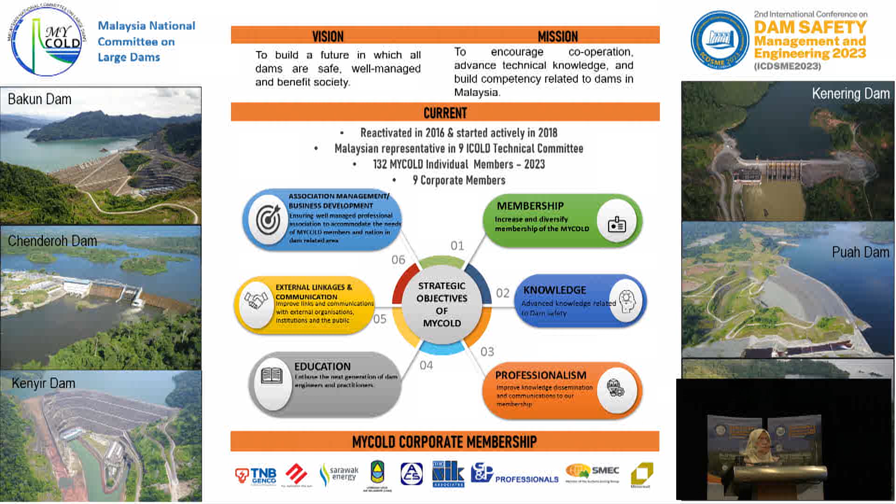I am honored to declare that at ICDSME 2023 conference, we have accepted 78 papers out of 95 submissions from 7 dam safety-related tracks. And all these papers will be published in Scopus Index publications.

At our conference, we have both technical and poster sessions where researchers from various institutions will demonstrate their works related to dam safety management. So it is inspiring to see participants and dam experts from more than 15 countries convene here in Kuala Lumpur, Malaysia, for presentation, exchange of knowledge, and to discuss important topics related to dam safety issues.

As part of this conference, MYCOLD has organized keynote speeches by prominent experts, pre- and post-conference workshops, and a forum on dam safety by world-renowned dam engineers under the theme of Resilient Dams for Safe Communities.

In addition, MYCOLD has also organized Best Dam Operator Awards to acknowledge the dam operators that follow best practices in order to ensure the safety of dams and surrounding public. We are also jointly arranging 2 technical tours to Sungai Perak Hydroelectric Scheme and also Klang Gate Smart Tunnel and Putrajaya Dam.

Distinguished guests and participants, I would like to express my heartfelt appreciation to MYCOLD for their invaluable cooperation and support in making this conference possible. And with that, I would like to extend our special thanks to Mr. Marcelino, President of MYCOLD, for his tireless efforts and dedication to our shared mission.

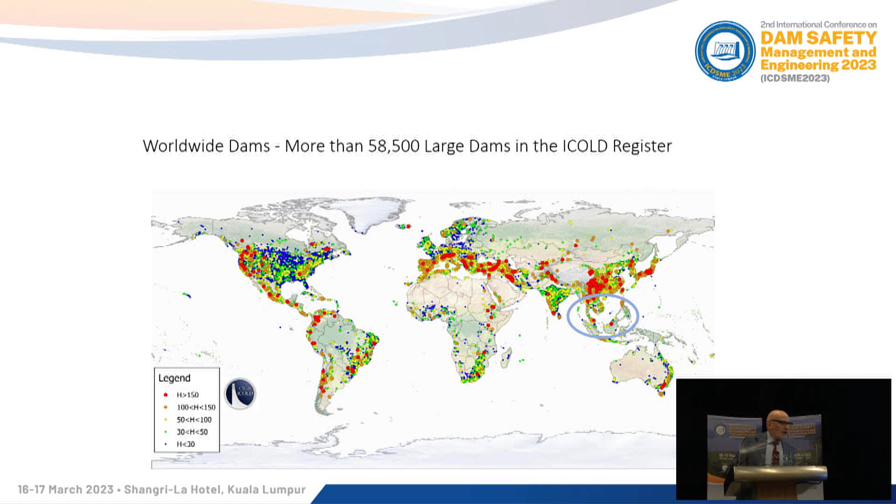Dams are numerous, with around 60,000 large dams in the ICOLD register, and of course there are more than that in reality. On this map you can see the distribution of dams in the world. The colors refer to the height, with red indicating dams higher than 150 meters.

Dams are important and unique infrastructures, and they deal with very critical subjects such as water, energy, and flood control. It is widely recognized that engineering failures and incidents provide valuable lessons and advance the state of practice.

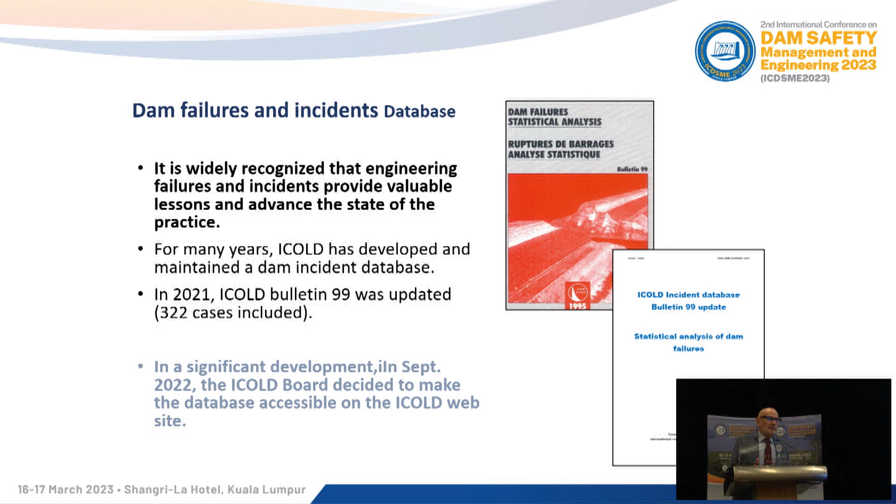For many years, ICOLD has developed and maintained a dam incident database. In 2021, ICOLD Bulletin 99 was updated as a significant development. In September 2022, the ICOLD board decided to make this database accessible on the ICOLD website. ICOLD has played a key role in the highly significant improvement in dam safety.

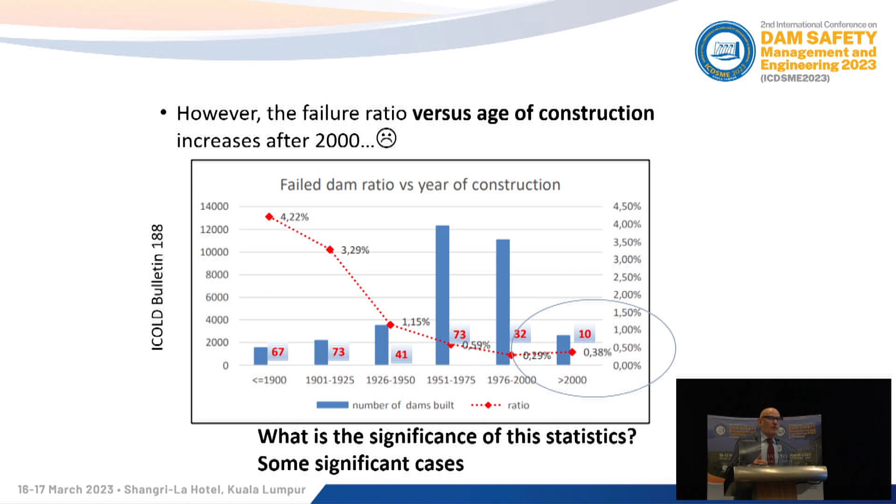What is the significance of these statistics? We will examine some significant cases of recent failures.

Tokwe Mukosi Dam, Zimbabwe, 2014, is a 90-meter-high CFRD dam with a reservoir capacity of 1.75 billion cubic meters. The reservoir filled up without its upstream facing, and you can see the result with water going through the embankment. The cause was an undersized diversion tunnel. Hopefully, no failure occurred, and the dam is currently in operation.

Ituango Dam, Colombia, May 2018, is a central core rockfill dam, 227 meters high, a very high dam with a big reservoir of 2.7 billion cubic meters. The diversion tunnel was blocked by a landslide near the end of construction, causing uncontrolled rising of the reservoir level. To save the dam, it was accepted to discharge the flow through the power plant cavern. 1,000 cubic meters per second were flowed under 200 meter head in unprepared waterways.

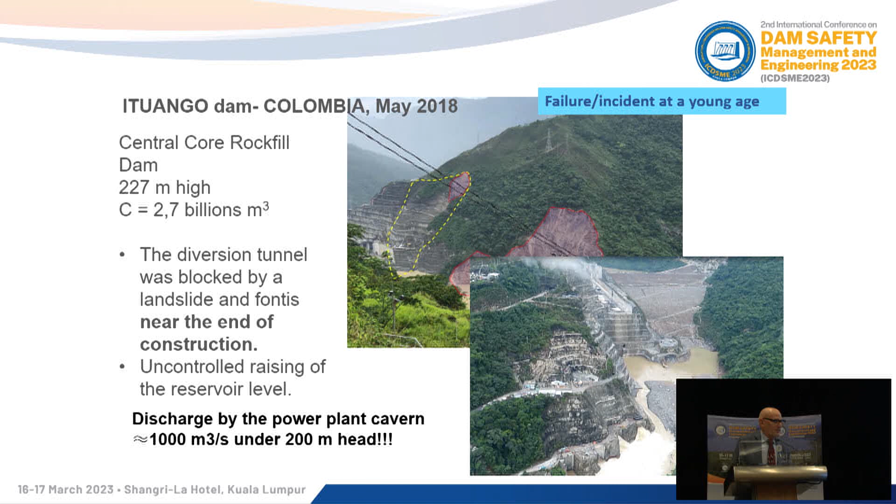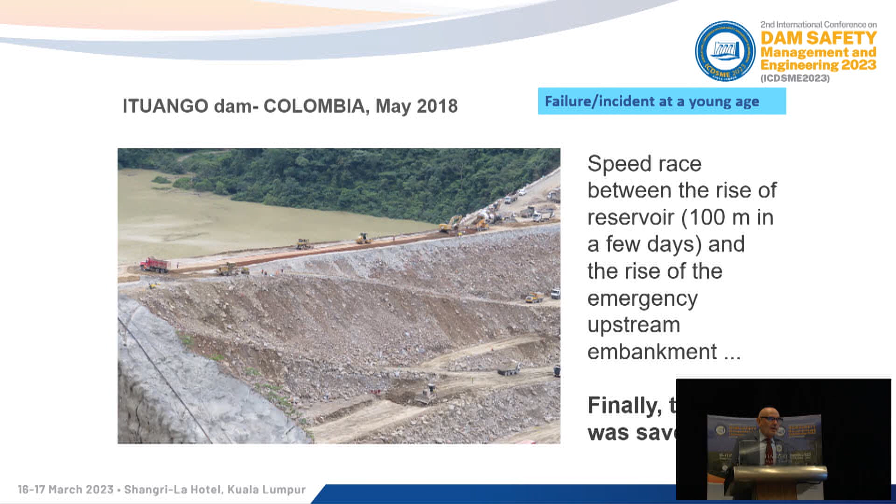There was a speed race between the rise of the reservoir, 100 meters in a few days, and the rise of an emergency upstream embankment. As you can see, it is not the total section of the dam, only a partial upstream section. Finally, and by chance, the dam was saved. But my comment is that we went very close to a major failure, which would have been terrible for our profession and the dam industry in general.

Another recent failure: Xe Pian-Xe Namnoy, not far from here in Asia, in July 2018 - failure of Saddle Dam D of a large hydroelectric scheme during the first filling.

Xe Pian-Xe Namnoy Saddle Dam is a homogeneous dike, 16 meters high on a 16 or 17 meter lateritic foundation. No foundation treatment was provided. Abnormal settlements were recorded before failure. No overtopping occurred. The cause of failure is regressive erosion in the pervious and erodible lateritic foundation.

The total volume of the Xe Namnoy reservoir was 1 billion cubic meters, and the released volume was 0.5 billion cubic meters. This means the failure of the Saddle Dam was completely equivalent to the failure of the main dam as far as volume release is concerned. And it happened in a secondary valley where no emergency plan had been prepared. 140 casualties occurred and more than 12,000 people were affected.

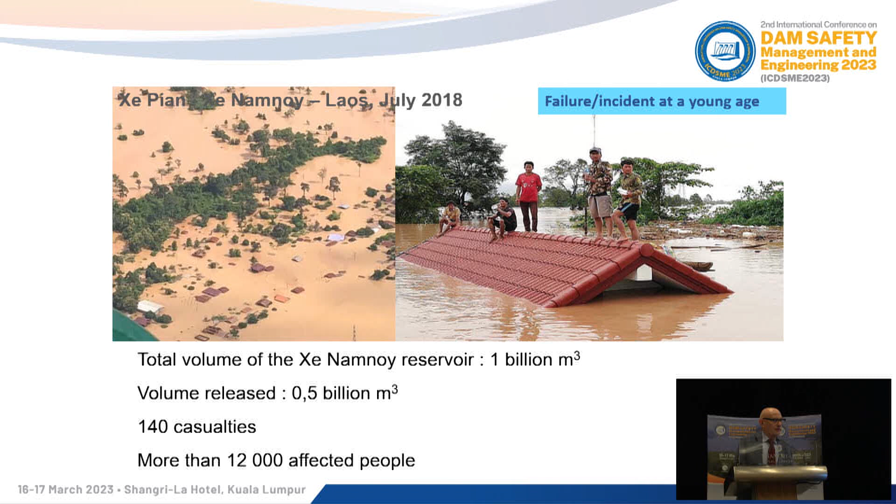Sardoba Dam, Uzbekistan, May 2020. An embankment dam, 29 meters high, commissioned in 2017. The volume of the reservoir was near 1 billion cubic meters, and the failure occurred during a flood.

There were severe transboundary issues. Few casualties were reported, but inundation and damage were very extensive. An emergency plan was activated, and 70,000 people were evacuated in Uzbekistan and 20,000 in Kazakhstan.

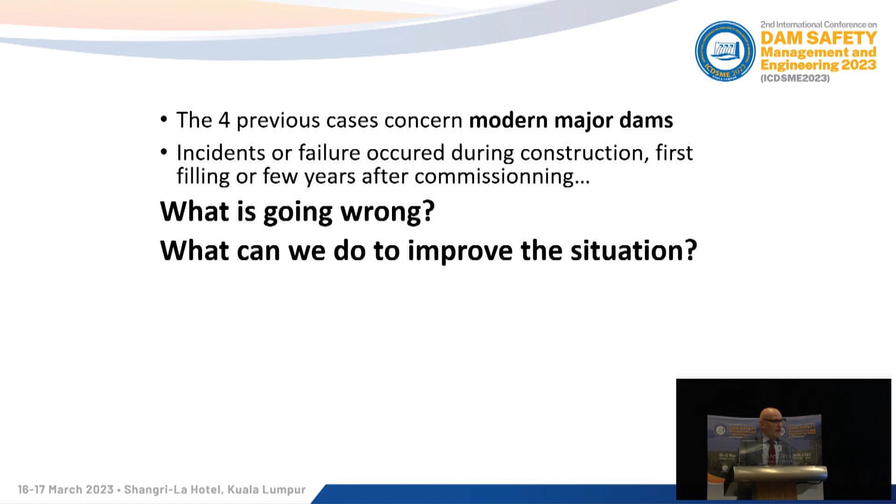All these failures occurred during construction or in the first years of operation, during first filling or the first year of operation. It's not acceptable that in very large, very structured projects, we have such type of incidents. So we are wondering what is going wrong, and what can we do to improve the situation.

The following cases are related to another very important failure context: failure during flood. And this risk, of course, is increased by climate change.

For example, also very recent, Edenville Dam in the USA failed in May 2020. It did not fail by overtopping, but it was filled very near to the crest, and this unprecedented level of reservoir caused static failure, static liquefaction failure. The dam broke, and a second dam downstream was overtopped and also destroyed.

In Xinfa Dam, China, the failure occurred by overtopping—you see this photograph just before failure, in July 2021. This is also a case of cascade failure: a downstream dam also failed after this event.

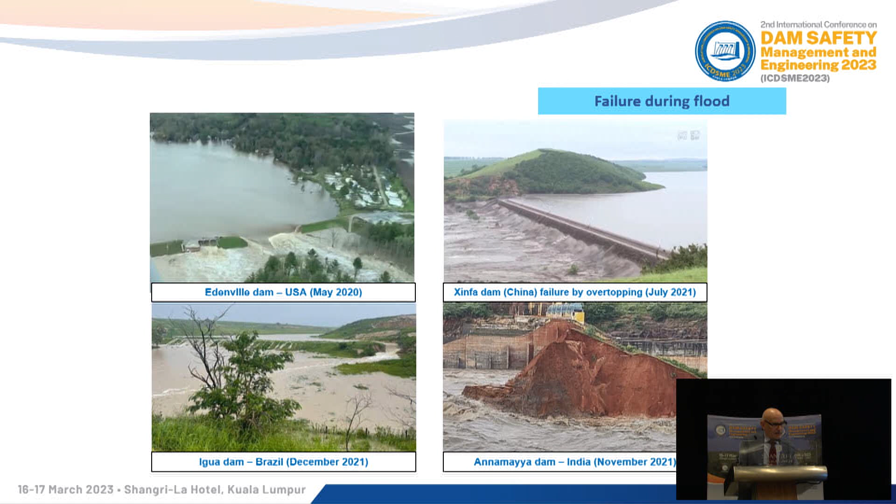ICOLD mission statement. Now I will speak a little about the World Declaration on Dam Safety. ICOLD's mission statement says that ICOLD leads the profession in setting standards and establishing guidelines to ensure that dams are built and operated safely, efficiently, economically, sustainably, and socially equitably. Dam safety has been a core value of ICOLD since its foundation in 1928. In 2019, ICOLD issued a World Declaration on Dam Safety, which you can see on the poster.

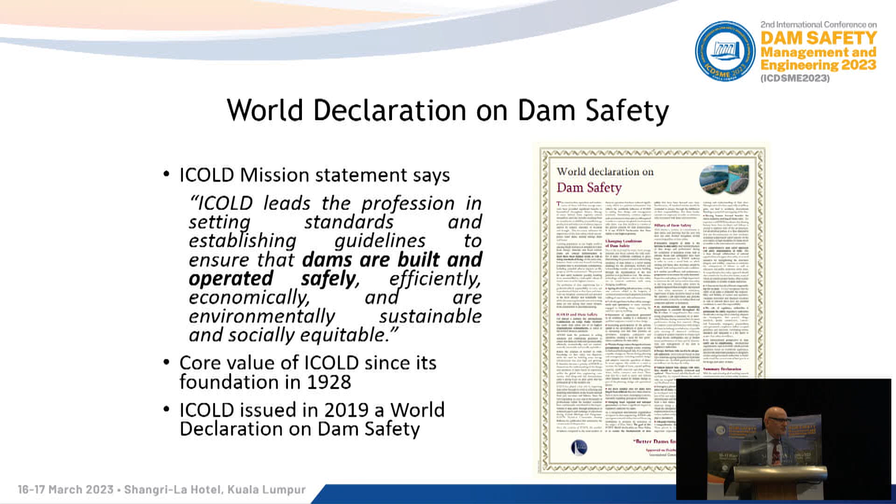What are the pillars of dam safety according to this declaration? First, structural safety: the dam must be safe in normal operation and in extreme conditions, flood and earthquake. ICOLD bulletins provide guidelines to address this structural safety.

The second pillar is vigilance in surveillance and monitoring. It is of utmost importance to understand the behavior and performance of the dam, to be prepared to maintain the dam if something is going wrong.

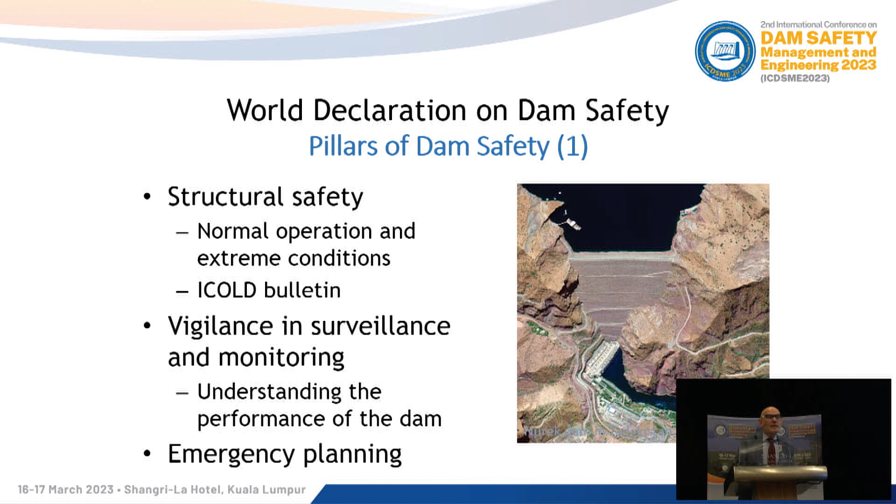And the third pillar is emergency preparedness. It is roughly said that if you have this type of plan, the losses—the casualties—are divided by something like 10 times. So it is very important. We cannot be sure that no dam will fail, but we have to be sure that the least possible number of people will be affected.

Another pillar of dam safety is sharing lessons of success and failure. It is of utmost importance that when we have dam incidents or accidents, it is largely published, and the Dam Safety ICOLD Committee is working very hard on this, and this information goes into a database accessible now to everybody.

Also, national governance is essential. It is the first level of dam safety. I appreciate a lot the efforts of Malaysia, who has recently stated a new framework of dam safety. Also, owner's responsibility. It should be clear for everybody that the owner is at the end responsible and liable for dam safety. And also, I mentioned a general trend in the dam community to go from traditional structural approach of dam safety to risk-informed decision-making.

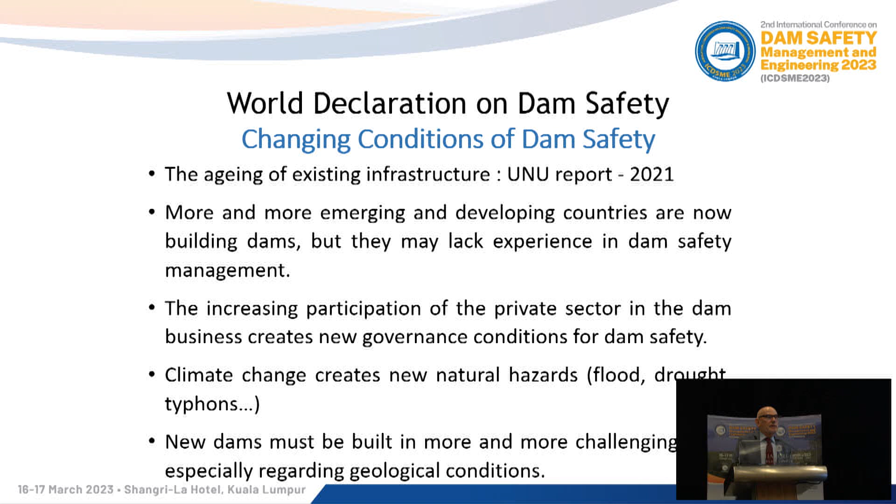Also, we have to acknowledge the changing conditions of dam safety, the aging of existing infrastructure. The United Nations University report in 2021 stressed this point. More and more emerging and developing countries are now building dams, and they may lack experience in dam safety management. The increasing participation of the private sector in dam business creates new governance conditions for dam safety. Climate change creates new natural hazards - flood, drought, typhoon, and so on. New dams must be built in more and more challenging sites, especially regarding geological conditions.

Now some words about ICOLD's action plan for dam safety. One of the first actions will be dissemination of the World Declaration on Dam Safety, and in a way it's what I am doing now, here. A didactic presentation of the World Declaration is prepared to be provided to the National Committee and to help them disseminate the message.

Dissemination of information on dam failures and incidents through the database on the ICOLD website. Capacity building enhancement, in partnership with international organizations, development banks, and everybody that is prepared to that. Promotion of dam safety panels of experts for new dam projects and rehabilitation projects. And last, ICOLD is thinking of preparing an ICOLD list of certified experts. This has not been decided at the moment, but it is in the pipeline.

So the key messages I would want you to retain from my speech are: first, dam safety is a core value to ICOLD. Dam safety relies on a strong national governance of dam safety. On the other side, dam safety is a personal duty and sacred responsibility to dam engineers. Failures and incidents provide valuable lessons and advances. Dam safety management is a daily activity and also a long-term commitment for many generations. Thank you very much for your attention.

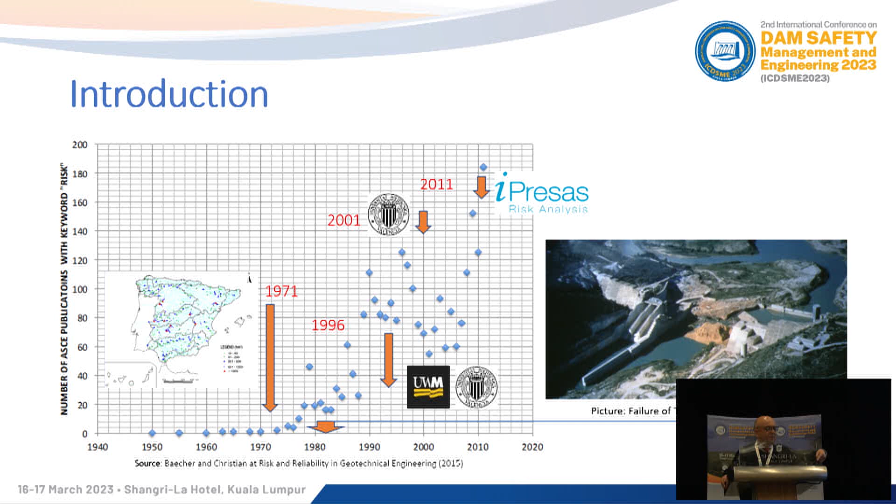I realize that I built my own career, which I will not repeat because Dr. Laria made it very nicely, over that graph. So it's a way to handle this.

In 1982, there was a major dam failure in Spain. It was 60 kilometers away from my home. I was 11 years old. As our president said, many lessons were learned from there. It had everything: there was a major flood, there was a failure in the power for the gates, there were some design problems, but that is the reason I'm here today.

I've built my whole career on this, and Spain has become the avant-garde of dam safety because of this failure, which of course we don't want anything like that to happen again, but we must learn from this accident.

From UPV, where I serve as professor, we created iPresas back in 2011. Except for me, we are a very young team, and we work almost everywhere. The lessons I'm bringing are from practical experience. It's not only a classical professor's PowerPoint. I hope to bring you some fresh insights from the field.

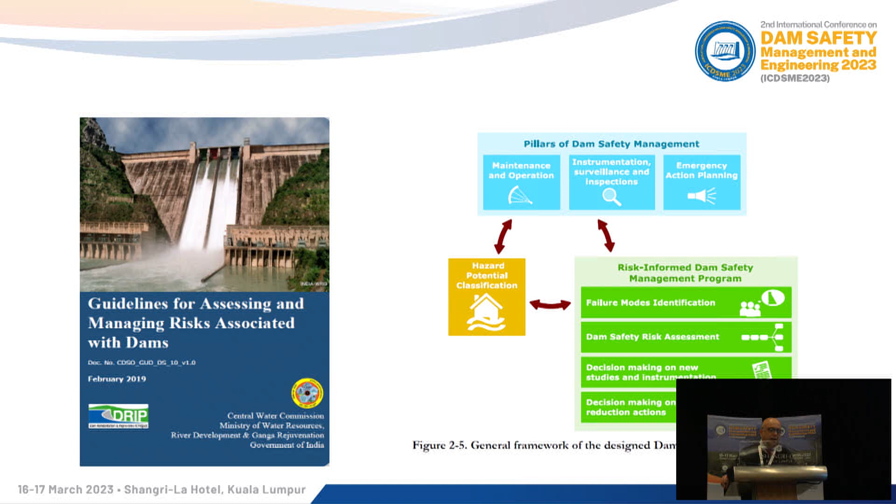I was hesitating to bring this slide, but at that time, the former Joint Secretary of State, Mr. Kundu, was hoping to use this impulse of the DRIP-1 to pass the bill on dam safety in India, and they finally made it in 2021. He very nicely quoted something I told him in a conversation: that we tend to associate innovation with high-tech algorithms and things like that.

But legislation is a very nice way to promote innovation. There might be one little sentence in one law that ignites a full new discipline because it has been backed in law. So let's not forget that lesson either: whenever we get our principles into law or legal documents, we are also creating a big advance in our profession.

Multilateral organisms like the Inter-American Bank of Development have developed guidelines, very recent guidelines. They started in 2007, the last update is 2021, and they acknowledge that they cannot support infrastructure, not only dams, but any infrastructure if it doesn't comply with the principles of disaster risk management and climate change adaptation. I've been working a lot for them in creating this body of knowledge for infrastructure, and we are learning many things.

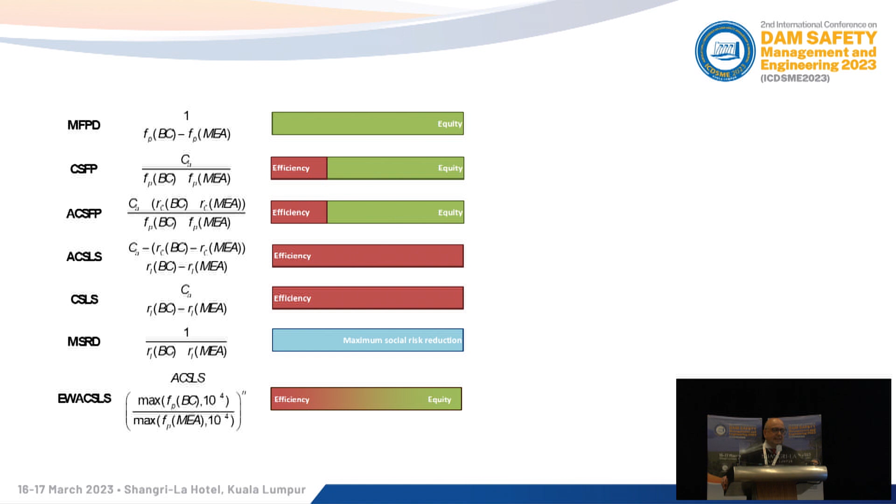These are just a few of the many equations. I think it's been a long time since I've used equations in a slide, but this must be my subconscious that brought some of them. It says if you take the cost of your investment in dam safety minus the economic risk that you save, and also divide it by how much you reduce the social risk, you have the first indicator. Then, if you weight it by how far you are from your target probability of failure, you have this very complete indicator.

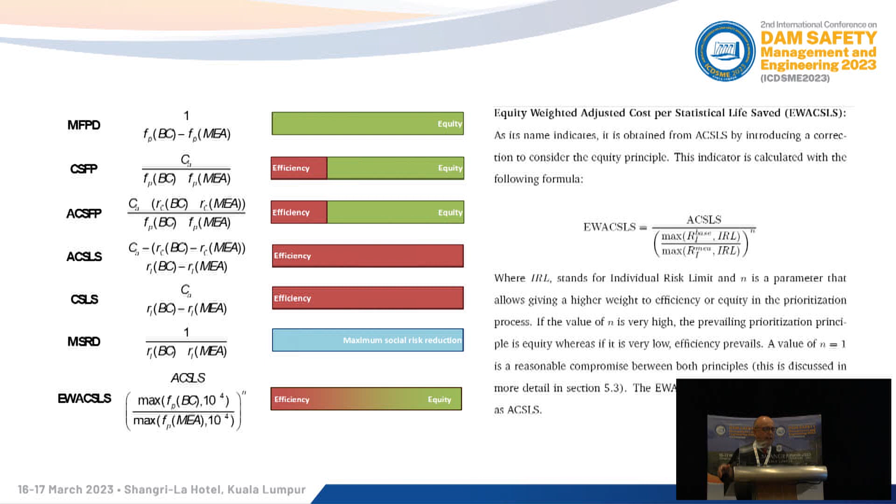As an example, at the Duero Basin Authority in Spain, we had in the pipeline more than 90 actions to do in dam safety. We had to spend roughly 100 million euros to keep our dams safe, and we needed to choose what is the best route to do that.

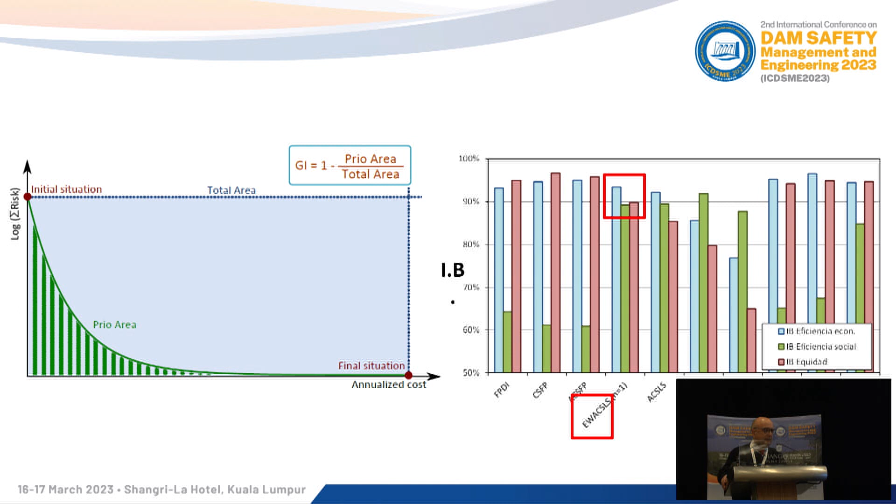I know there are plenty of researchers in the room, so there are some papers you can download that explain, at a high level, the use of these risk indicators in investment decision-making. These two papers explain much better than me today what I was trying to communicate, but there are other papers as well.

Also, if you're interested in how to apply these techniques to systems of dams, or mixed systems of dams and levees, or where uncertainty might be affecting your path, we have developed a lot of research and practice on this that I kindly invite you to download and read.

Time-dependent issues include climate change, and there are more things going on—we'll see more of them. You can imagine that the social dynamics, how people move from one place to another, the exposure behind our dams, is one very strong factor together with climate change.

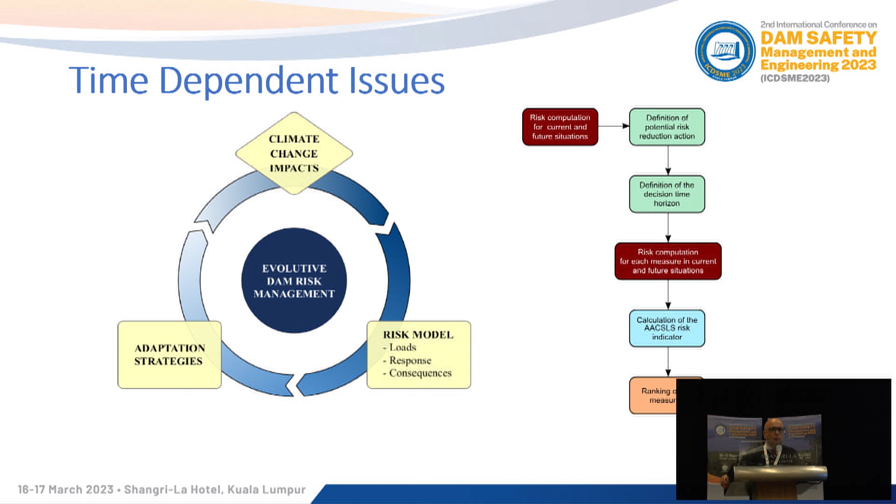Remember, in many systems we might be having more extreme floods, but we might also be having a lack of water resources, and sometimes these effects will compensate.

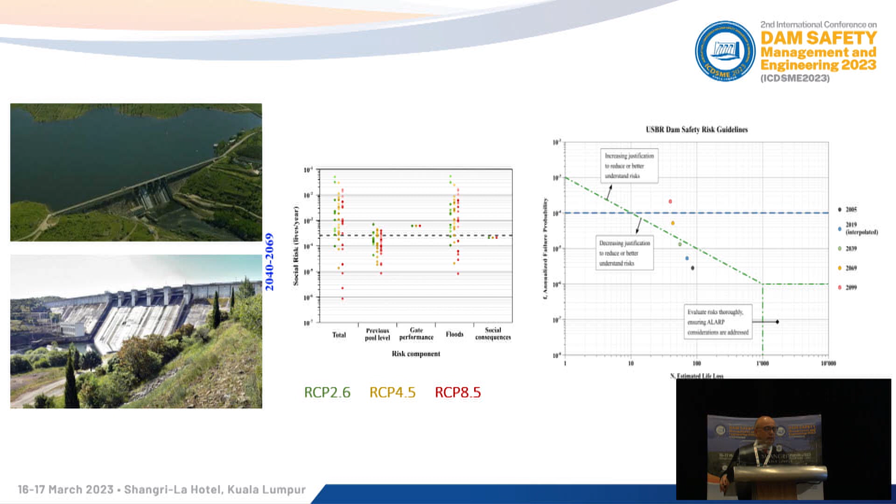It will also help us understand how often we have to repeat the analysis to incorporate new knowledge that has been generated. So I don't say that's going to happen in that dam—I say that's the best we can forecast with the data we have today, and we will keep working on that. The important lesson is we have tools to get prepared on time, and we should be looking at those tools.

Time-dependent things can be less mysterious than climate change—everything takes time. We need not only to decide what we invest in, but what the timeline is. Some investments take years to approve and put in place; others are very fast, and we need to incorporate the variable T in our equation. We were happier 20 years ago when we were thinking of risk in a more static vision.

This is an example from a regional government in Spain. We've worked with them for many years. I think I presented some pre-results in Ottawa at the ICOLD conference.

You see that they went through a path over a number of years. The dams are not that high, but they are very significant—very useful in terms of water supply—and they have plenty of problems. I wouldn't call them pathologies, but at least major problems.

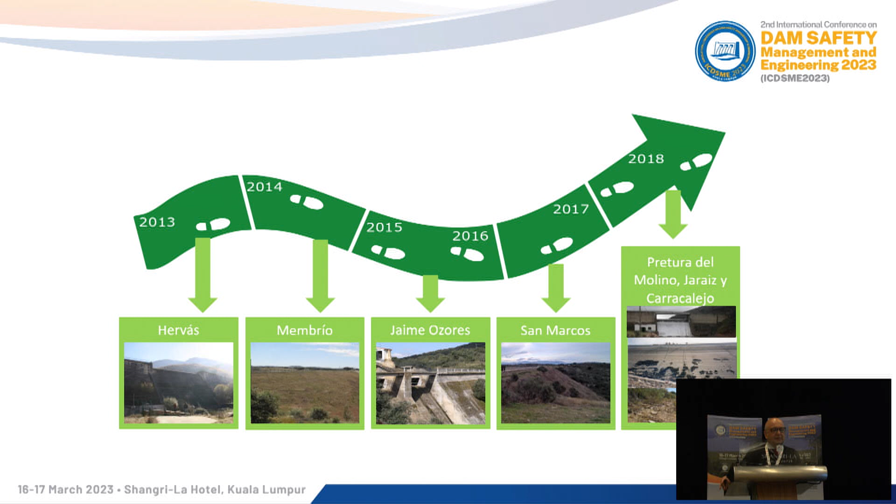Now, when we analyze them, we go through the whole process: we do the failure mode analysis, we do quantitative risk analysis, and we find a list of to-dos. Some of them are implemented, some ongoing, some planned. But this cannot be a static picture of the plan, because we will be gathering new information, having problems implementing some actions, facing delays, and encountering windows of opportunity that we cannot renounce.

If we have an opportunity to do something, we are not going to say, just wait a second, I'm two more behind in the list, right? So we have to incorporate all that flexibility in our management.

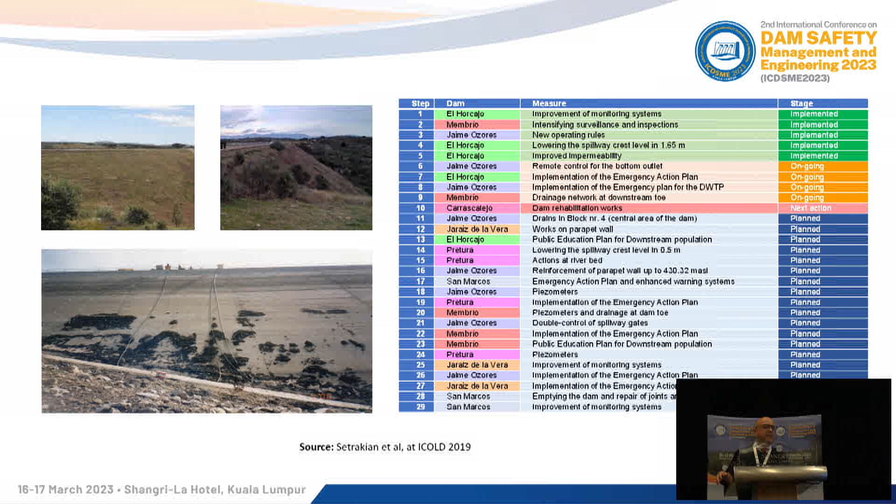It includes design of the rehabs, and yes, we can use risk to make our design as accurate as possible. In this case, we use risk to decide how much we had to lower the crest of that spillway.

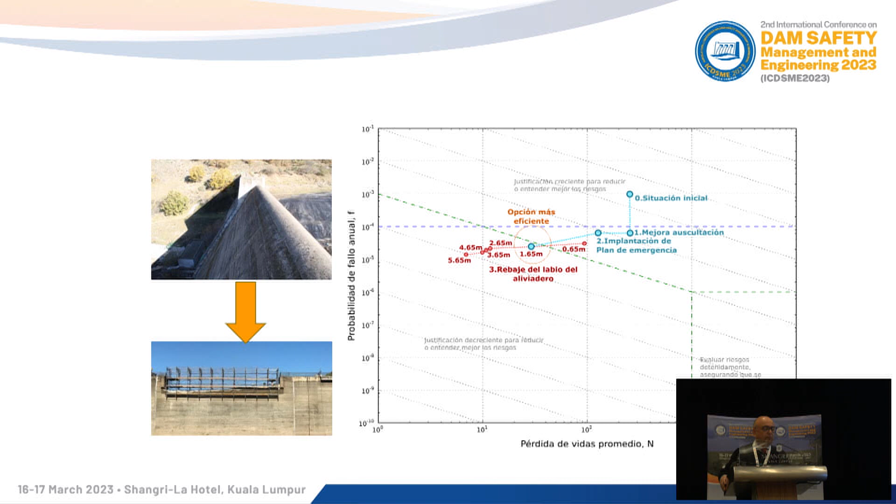We have incorporated the variable T in our tools to allow owners to re-estimate the path of risk reduction when they gather new information, for instance from instrumentation, or new estimates on climate change, or something as simple as: I have the opportunity to do this thing first, and how does it affect my risk reduction path? In the workshop we had yesterday, we calculated many of these paths, and some of you that were there yesterday will appreciate this in a different manner.

So at the end, the tools we are providing today have risk, have investments, but also have a timeline, and allow you to re-evaluate your path of investments according to better knowledge or these different realities around your dam and environment.

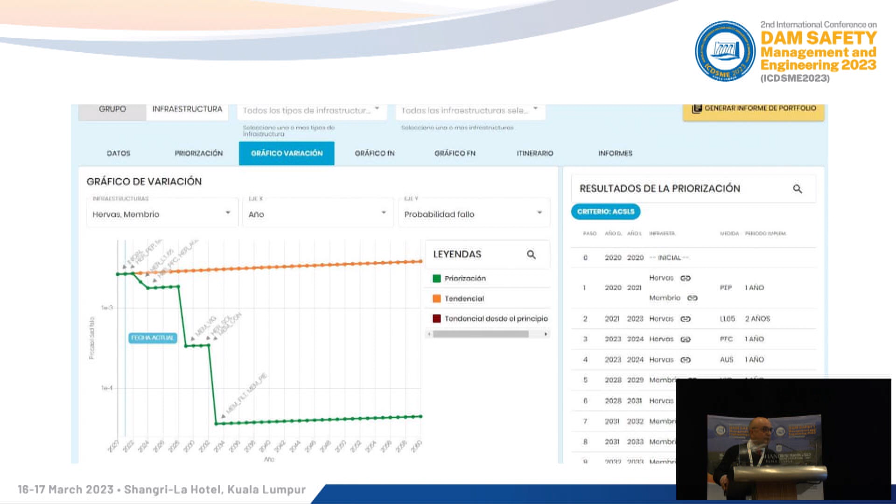You can also dig into this in papers in indexed journals, and I encourage particularly young researchers at university to go through this, but also professionals, hopefully they will be inspiring or provide some little light in this complex problem.

Next, please. Some international examples, because if you don't show what you do in the field, it's what I call - I think I said that yesterday also in the workshop - a PowerPoint dam safety presentation, but it's not real dam safety practice if it's only in the PowerPoint.

So we can escalate the intensity and the complexity of the different tools. This is, for instance, Brazil. We use a screening type of tool, and regardless, screening risk analysis is not suitable to make big decisions. It was very useful to organize the information, to understand what were the general pathologies of the dams, and it enforced many other actions in a significant number of dams that we could visit, and we calculated the so-called risk indexes for them.

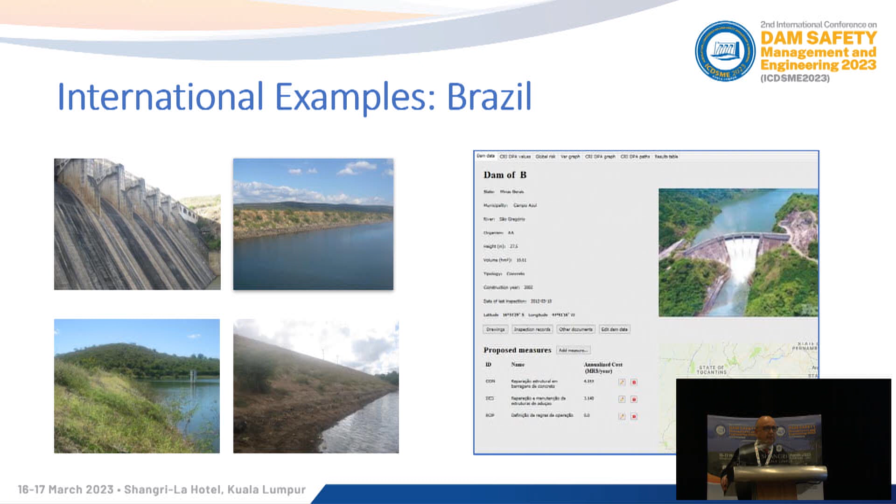India, as I mentioned, and Devendra, I think, is there. I think India must be very proud of what they have achieved in these last years. And we had the opportunity to do a full pilot case that has been incorporated in the Indian guidelines.

And we studied Bhadra Dam. We provided what we thought could be a risk reduction path, but also what would be the most efficient gathering of new information. For instance, if the uncertainty is brought by hydrology, and you were thinking in major investments in spillways, you have to balance between gathering information and make sure you do a no-regret type of investment.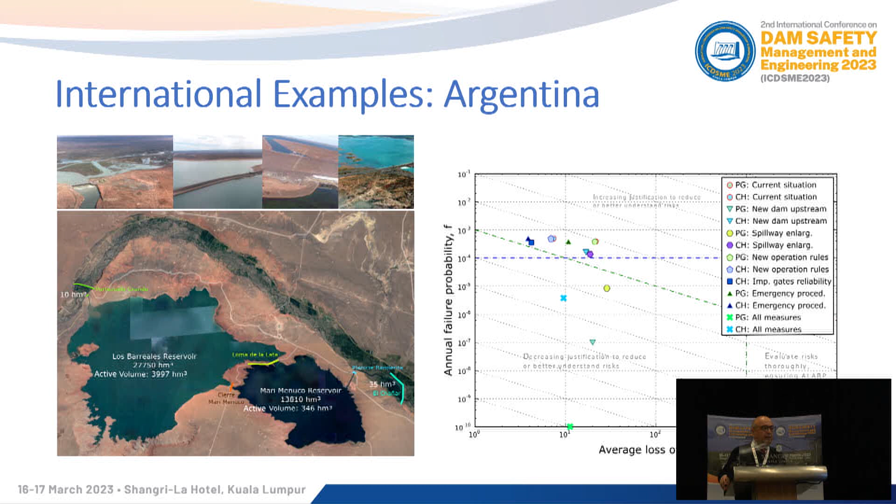by improving gate reliability and changing the operation, and using a new dam that will be built upstream for flood protection, to really put the system in a very comfortable area.

Next, please. I'm finishing. Malaysia.

Malaysia, TNB, GENCO, and UNITEN are doing a very ambitious work. They used four of the dams to navigate all what I have said in my conference so far, from a screening tool to a risk assessment that can be potentially used in any other dam, and creating a risk-informed process.

I have to say that it is very ambitious, but it's kind of what I don't want to call mainstream, because that's like lowering it, but after everything has been backed by the World Bank, the IDB, so many ICOLD committees and bulletins, this is theoretically mainstream. In practice, there's a long way to go.

And Malaysia has taken a significant lead in this, and I have to acknowledge and appreciate that. Next.

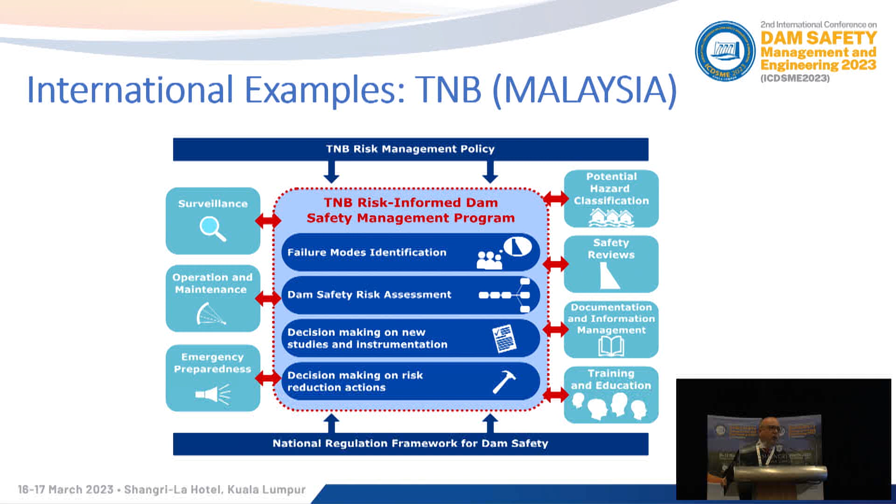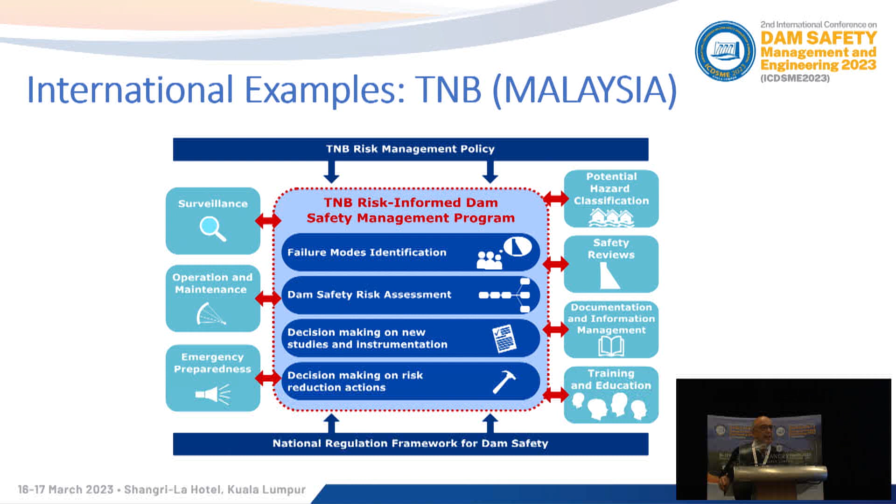So, again, final remark. They are using risk acknowledging that it has to be linked to good practice in dam safety. So everything around classical and the pillars of dam safety are integrated in the risk-informed framework. From emergency preparedness to safety reviews, all is fitting the risk-informed framework.

Next, please. Spain, full-scale national dam scheme. I will not take much time on this, but the government is doing it for 370 dams at the same time and in 4 years. So it's a very big challenge.

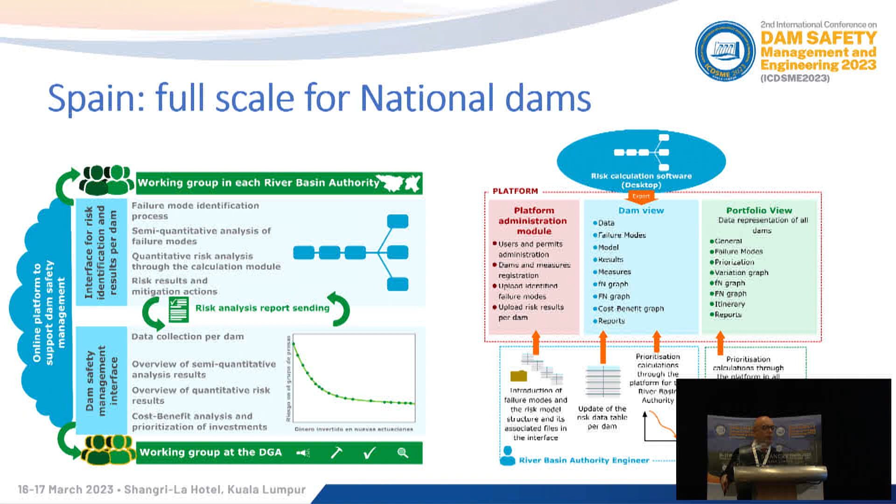Next, please. This is very similar to what I said about the Malaysian approach, in which there's qualitative assessment, quantitative assessment, and two queues of investment: the investment in knowing more and gathering better knowledge, and the investment in rehab. The two queues have to coexist properly and with periodic updates.

Next and last, please. I think we often forget about the people. You don't make this happen overnight. You need people to do the assessments, you need trained people, you need smart people, and you need motivated people. How do you get that? That doesn't happen because you want it. It needs a plan. And it's an amazing challenge, but the best of the risk-informed process is how you engage people in dam safety.

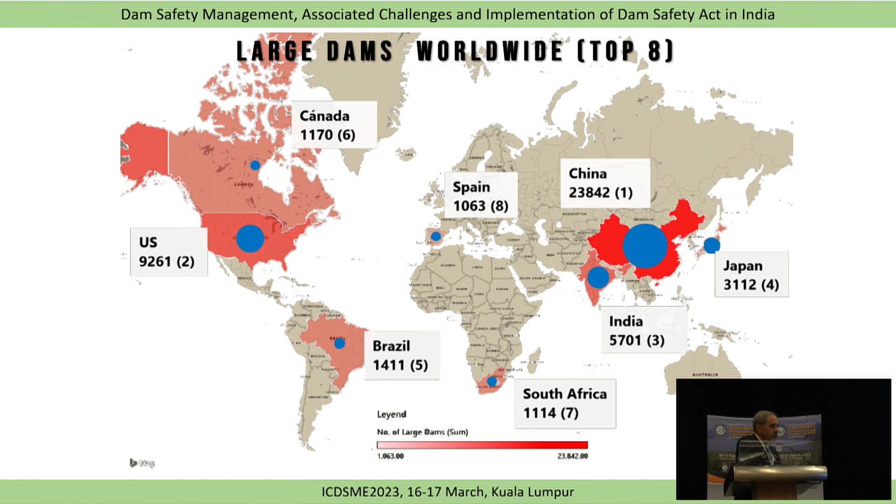Okay, so as you're aware, the largest number of dams in the world are in China, followed by United States, and third is India. So we have about 5,700 large dams. We have about 2% of land resources, 4% of water, and 18% of the world's population. So there's a big challenge to provide water security to 18% of the population in the world. Next.

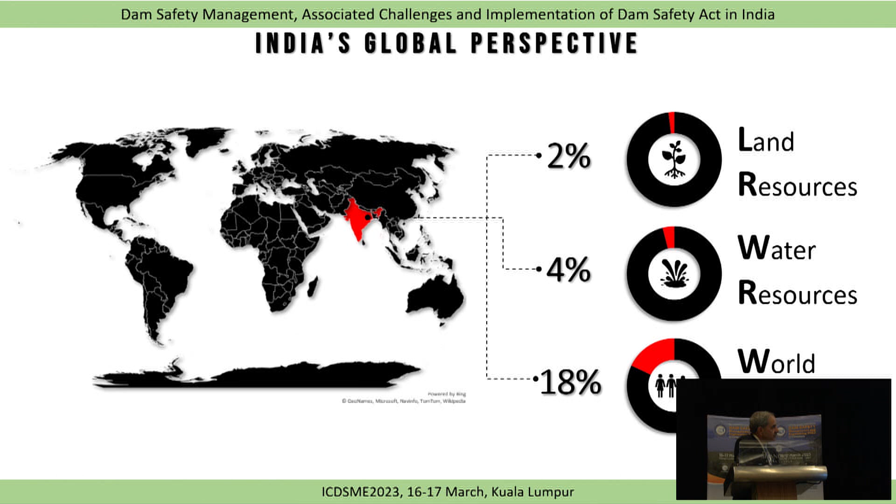There are about 5,700 dams in India, and the largest number comes from the western part of the country and the central part - Maharashtra, followed by Madhya Pradesh, followed by Gujarat. The numbers are concentrated in central and western India, whereas the large dams are in the Himalayas. Up there, the numbers are small, but the capacity of those dams is very large.

The dams are aging, and we have about 293 dams which are more than 100 years of age, about 1,050 dams which are 50 to 100 years of age, and about 3,000 dams which are between 25 to 50 years of age. So the dams are aging very fast, and we need to act on dam safety in a big way.

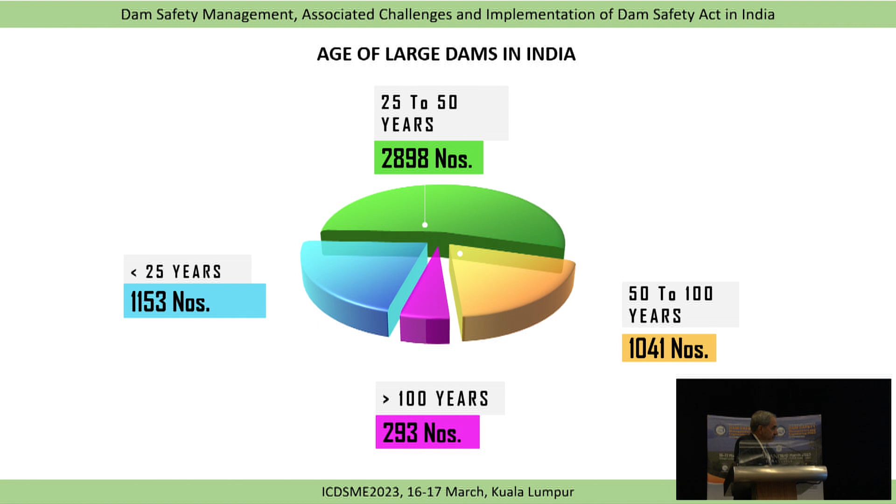We have dams which are 20 centuries old. In the 2nd century, we have the oldest Thanjavur Dam, which is still working. We have a dam which was constructed in the 10th century, and it is also working. Another dam, constructed in 1892 in Mumbai, is still under operation.

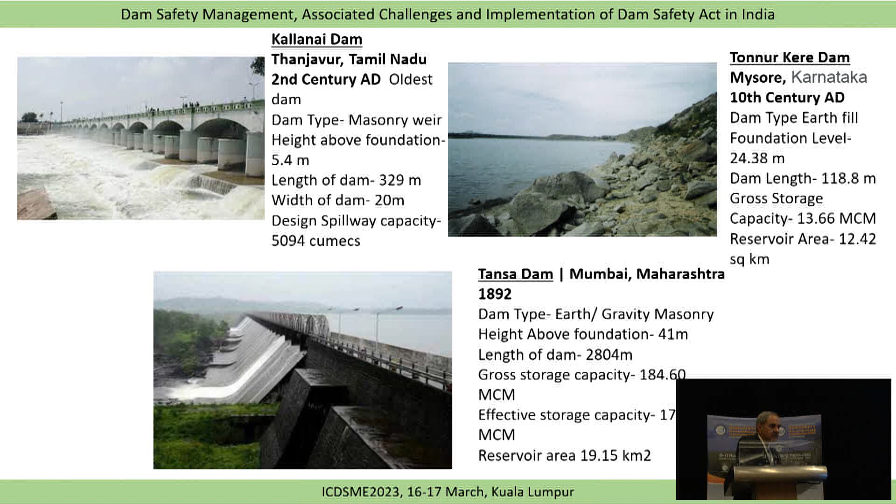And I remember in the year 1985 or so, we started saying in India that we have a duckbill spillway, which was redesigned to pass a higher flood. We also have the Borgua Tal Dam, from 1694, constructed by the then Maharaja of the state.

Regarding dam safety initiatives - dam safety is something which is an ongoing process. You can't do it in a day. You have to focus on it on a long-term basis and it needs concentrated efforts. If you think you'll do dam safety in a year or two years, you are mistaken. We have to make it a way of life and inculcate it into the system.

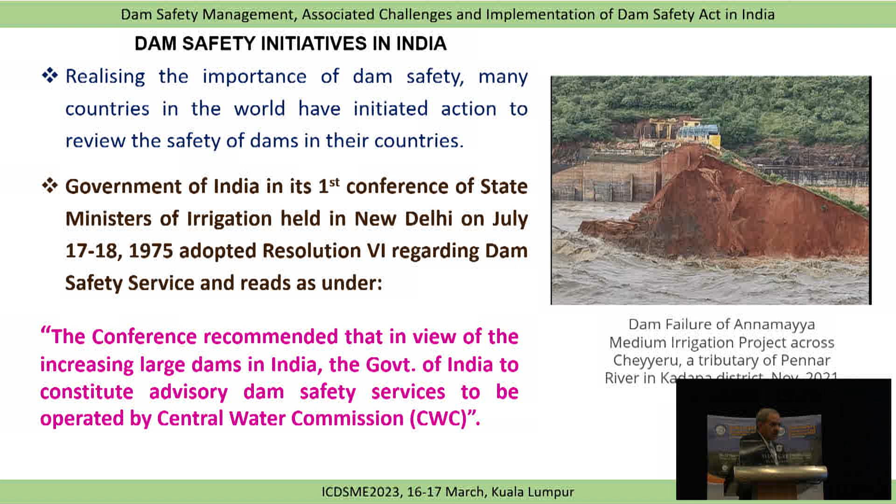Then in 1979, there was a big failure - the Machu Dam failure in Gujarat - and about 1,800 people lost their lives. Taking a lesson from this failure, we established the Central Dam Safety Organization, with the objective to assist in identifying causes of potential distress, perform a coordinative and advisory role for state governments, lay down guidelines, compile technical literature, organize training, etc., to create awareness in the states about dam safety. The limitation was there was no legal framework, and this organization had no power of enforcement - they were an advisory body telling states things that were not enforceable. That was the drawback.

The Central Water Commission then encouraged the states to have their own dam safety organizations, and immediately 18 states and some Government of India organizations followed and started working on it. Again, there was no uniformity in administrative setup or functions of these dam safety organizations. In the majority of cases, the role of the dam safety organization was restricted to an advisory capacity, with little scope for proactive intervention in dam safety and rehabilitation measures.

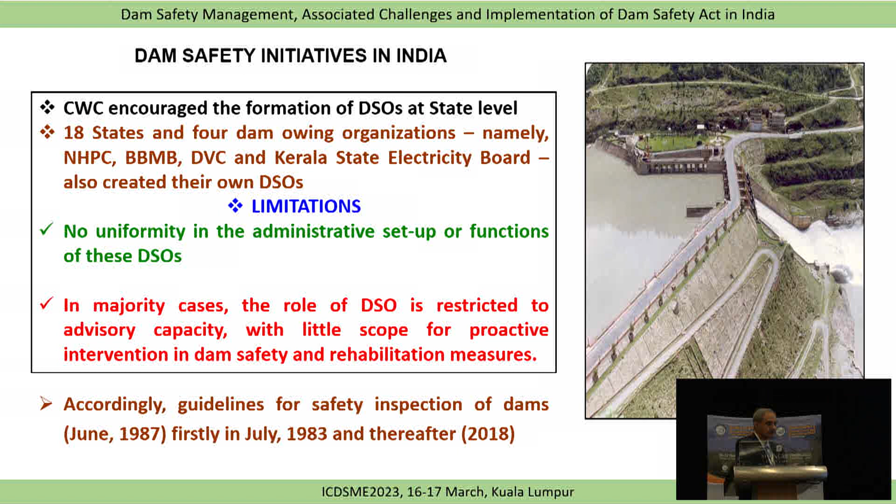Keeping that in mind, we started working, in 1991, on dam safety for our dams, and we rehabilitated about 33 dams. Banking upon that success, we thought - why not take it up in a big way? In 2012, we started the Dam Rehabilitation and Improvement Project. This was a 10-year plan, and it concluded in 2021.

Then phase 2 of the project started in October 2021, and we also came up with the Dam Safety Act in December 2021. This act had been debated for almost 3 decades - debated many times in the Indian Parliament - and the question was how states and the federal structure should divide powers, and how the act should very delicately avoid impinging upon the powers of the state governments.

As I told you, in the year 1979, we had a major dam failure. So far we have recorded 42 reported dam failures in India. 6 are masonry dams and 36 are embankment dams. These embankment dams were old dams constructed when they were not designed properly, most of them.

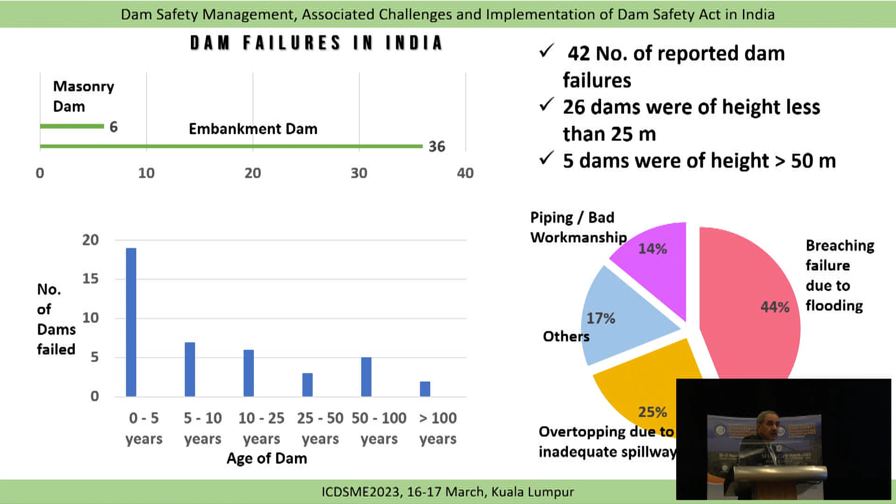So we started, as I told you, phase 1 of our Dam Rehabilitation and Improvement Project. The objective is to improve safety and operational performance of selected dams along with institutional strengthening with a system-wide management approach. The amount spent was about $350 million.

223 dams located in 7 Indian states were rehabilitated. There were different components, and supervision was carried out under Central Water Commission. The key achievement was that the efforts were joint efforts of central and state government, and this was one of the confidence building measures. The Indian states thought that the government of India coming forward under the DRIP program had helped them in a big way.

We carried out institutional strengthening, rehabilitation of 33 plus 223 dams on structural and non-structural measures, environmental emergency action plans, and O&M manuals were prepared for these dams. Capacity building was carried out through trainings and workshops. As Professor Ignacio told, we had 11 guidelines related to dam safety aspects, and we also started long-term asset management through a web-based tool known as the Dam Health and Rehabilitation Monitoring Application. We started the MTech program in the Indian Institute of Science, Bangalore, and the Indian Institute of Technology, Roorkee.

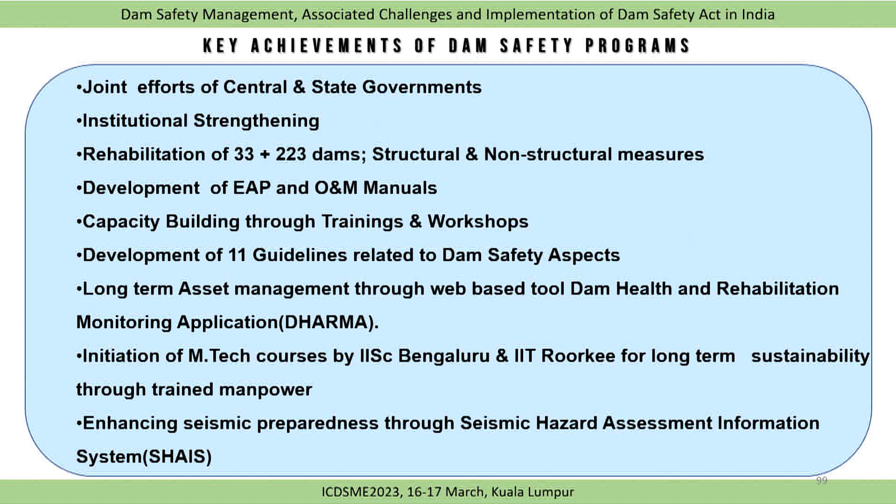Enhancing seismic preparedness through a seismic hazard assessment information system was also carried out. The phase 2 and 3 program is a 10-year program, and it's more ambitious compared to the first one, covering 736 dams in 19 Indian states and 3 Government of India agencies. It's a 10-year program with phase 2 of 6 years and phase 3 of 6 years, with a 2-year overlap between phase 2 and 3.

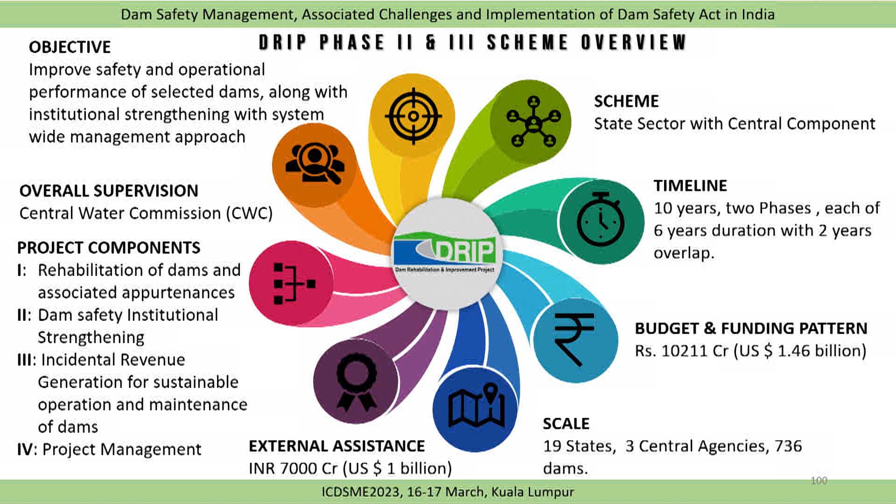Now I'll talk to you about the Dam Safety Act, which is the core of dam safety in India. It was in December 2021 that we enacted this act, and the purpose is to provide for surveillance, inspection, operation and monitoring, and maintenance of specified dams for prevention of dam failure related disasters, and to provide for an institutional mechanism to ensure their safe functioning and for matters connected therewith or incidental thereto. So it has 11 chapters, 56 clauses, and 3 schedules.

So the institutional mechanism under the Dam Safety Act: the topmost body is the National Committee on Dam Safety, an advisory body which makes policy decisions. It sets the policies and guidelines for how dam safety is to be carried out, and I'm happy to share that I'm one of the members in this committee — we have 2 expert members, and I'm one of them. We also have the National Dam Safety Authority, which is the body that enforces the law. The National Committee is the advisory body, but the highest body.

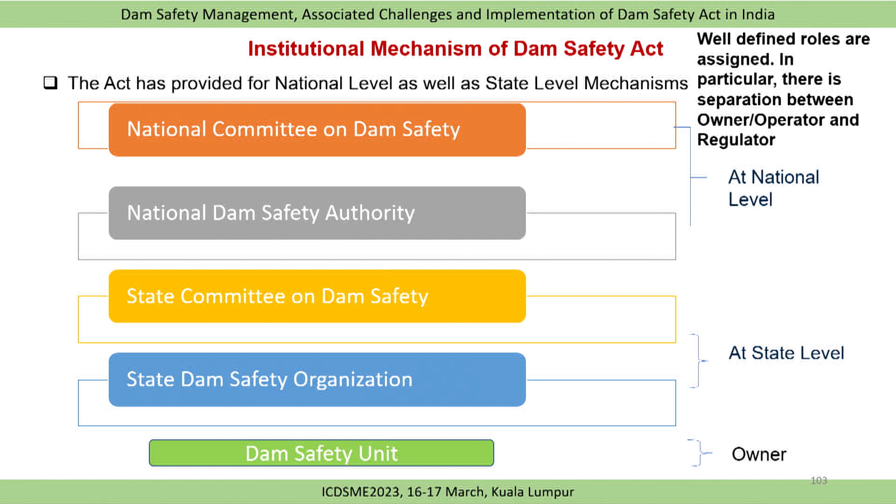This act applies to all specified dams. Specified dams are large dams covered above 15 meters of height, measured from the lowest foundation level, and dams between 10 to 15 meters with different criteria: length of crest not less than 500 meters, capacity of reservoir formed by the dam not less than 1 million cubic meters, and maximum flood discharge dealt with by the dam not less than 2,000 cubic meters per second.

A dam has specifically difficult foundation problems, or is of unusual design. These are somewhat subjective criteria where engineers can decide their dam has difficult problems, so it should also be termed a specified dam. Similarly for unusual design - nothing is inherently unusual, but some dams are being constructed under difficult situations these days, so that is also included under specified dams.

These are the different chapters under the Dam Safety Act.

This is how the entire institutional arrangement takes place. It is the National Committee on Dam Safety which gives policy guidelines to the National Dam Safety Authority. It has subcommittees which decide on policy issues and also produce written documents on different aspects of dam safety. The Dam Safety Authority is answerable to the Ministry of Jal Shakti, which is water resources, and the ministry in turn is answerable to the Indian Parliament.

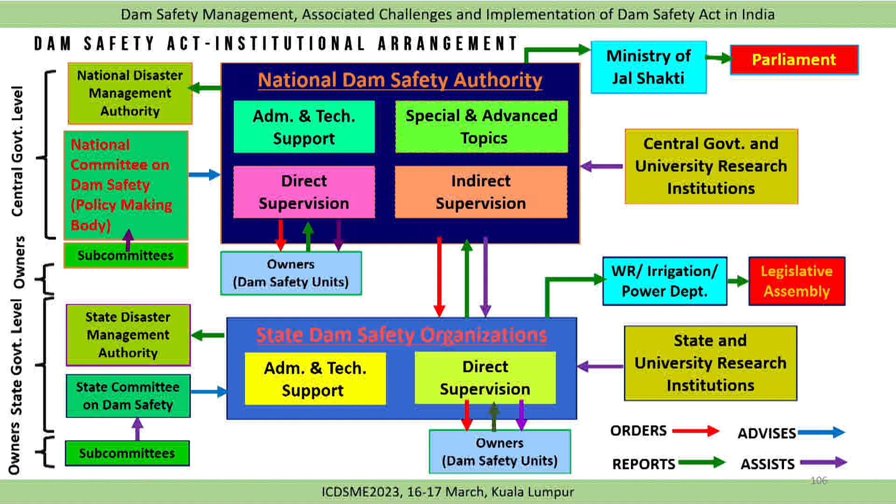What are the challenges? It's very difficult to implement things. As I told in the beginning, it looks good that we have an act, but enforcing this act for 5,700 dams is not an easy task - it's a big challenge. We have expertise at the national level, a lot of expertise available, but when it flows down to each individual dam, there's a lack of expertise in dam owners' agencies, especially in the states, with flood hazard mapping, advanced hydraulic simulations, quantitative risk assessment, and the capacity and expertise of state dam safety organizations to assume their new role.

We adopted this act in December 2021, and they have limitations with expertise, the state governments especially. We need to do a lot of work to create this expertise at the state dam safety organizations level. Capacity and expertise of owners and operators to enforce the Dam Safety Act is limited. Trainings are required on a long-term basis for long-term sustainability of the intended objectives.

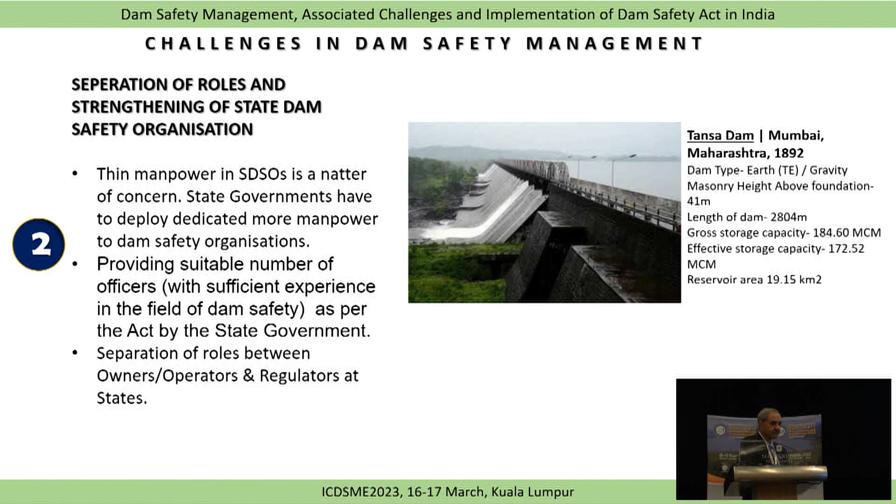Reservoir siltation, yes, it's a big problem. I remember when I was a young engineer, it was told it's a typical Asian problem, but now the entire world says it's a big problem. I have experience carrying out sedimentation and mechanical dredging also - it's not a solution, it's not cost effective at all, it's very expensive. So we need to work on silt management rather than carrying out mechanical dredging.

The sedimentation rate in India is quite high, at 0.72% per year, and till date we have lost about 32 billion cubic meters of capacity.

Instrumentation and monitoring is another area of concern - in earlier dams, instruments were either not installed, or if they were installed, they are not functioning in most of the dams which were constructed in earlier days.

Climate change uncertainties are building up, and we need to redesign our codes. The standard guidelines and code of practices need to be modified to cater to climate change uncertainties. We also need to redesign the spillway capacities. In many cases we have done this, but it's very difficult, and seasonal and annual variation in rainfall pattern is affecting it in a big way. We have seen uncertainties in many rivers where many lives were also lost.

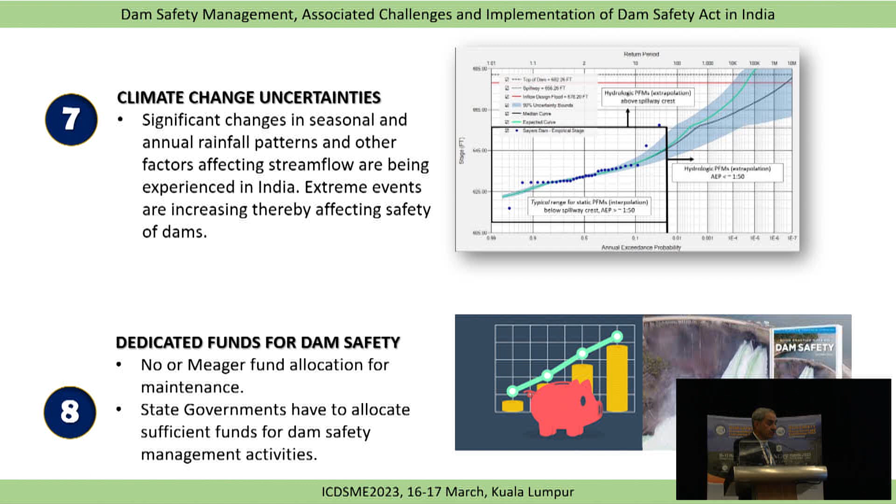Dedicated funds for dam safety is another thing. Although the state governments are now coming forward, because it's their responsibility, they are coming forward to provide these funds.

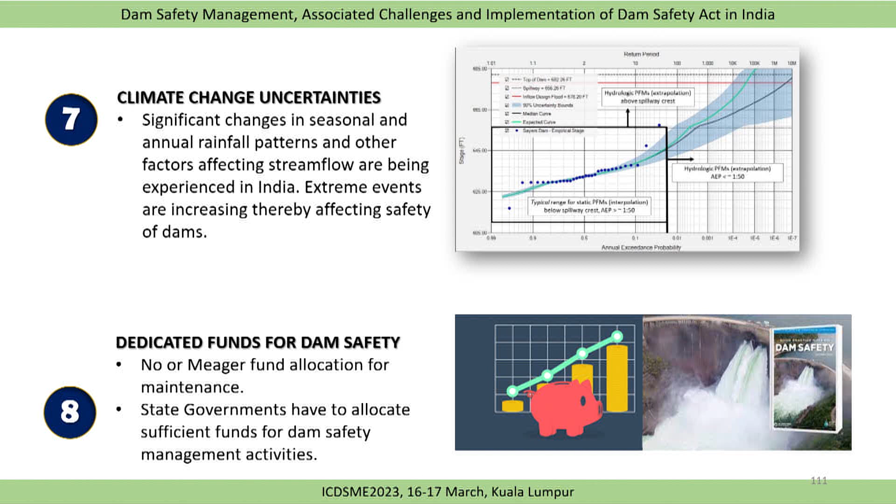Dam designs: about 300 dams are more than 100 years old, and the drawings for these dams do not exist. So if you have to carry out any remedial or rehabilitation measures, you are lost in the dark. You do not know what has been done in these dams. So that's another challenge where we need to work, and we are working on it - reverse engineering, they say.

Next year, India is organizing the 92nd annual meeting of the International Commission on Large Dams. It's in New Delhi from 18th to 24th October. I invite all of you to visit New Delhi, to visit India, to visit the beautiful places in New Delhi, and share your expertise with us. And also, we would want that whatever little we have done in the field of dam safety, we share with the rest of the world.

Looking forward to the World Dam Professionals and ICOLD family to join the 92nd ICOLD annual meeting and symposium from 18th to 24th October in a big way in New Delhi, to enjoy the Indian hospitality. Thank you.

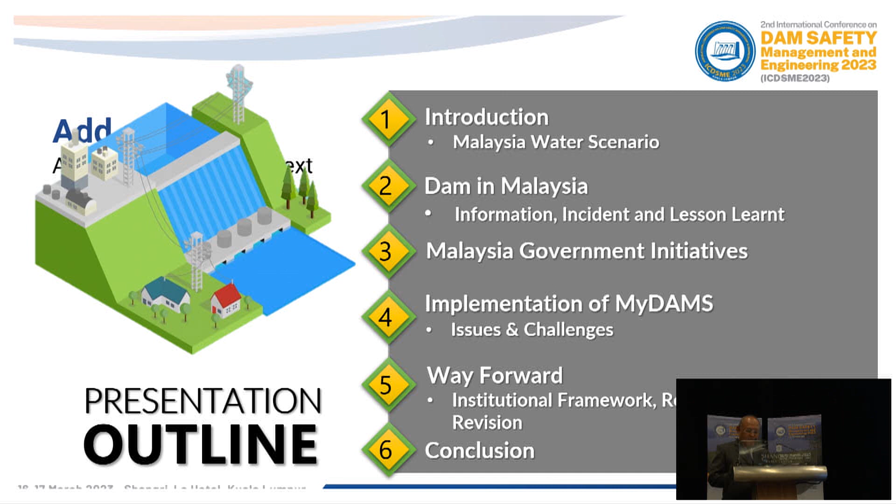There's a total of 84 billion cubic meters of water, approximately 70% of Malaysian water resources are stored in dams. Hence, ensuring that dams in this country operate optimally and in safe condition is very, very crucial. As a developing nation, we face various issues and challenges to ensure dam safety. During certain periods of each year, we receive heavy or continuous rains where the dams are at full capacity, posing risk and resulting in floods when the water overflows.

Recently, we had a flood event when we released water from 3 dams in the south of the country. However, contradictorily, during certain periods of each year, we have too little water - reduction in rainfall causing shortage of water in our dams, which further causes shortage of water supply. Our dams are constructed for various purposes, including flood mitigation, irrigation, water supply, hydropower, silt retention, and recreation. Hence, efficient management of dam operations will reduce the risk of flood and water shortage in both situations, when there is too much or too little water. Malaysia has 104 dams in total, and most of the dams are for water supply.

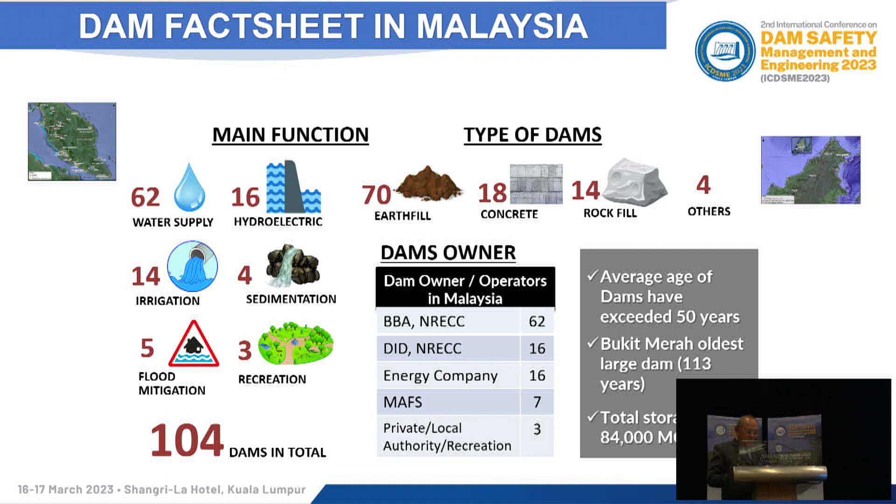Dams in the country are managed either under the federal government, state government, or private ownership. Most of the dams are over 50 years old, and some are over 100 years old. The challenge we have is how to multi-purpose these dams, because most of them are single function. Years ahead, we are thinking how to make it multi-purpose.

Fortunately, since 1883, there has never been a dam disaster in Malaysia. However, as dams age, we are faced with the reality that we need to address their status from a safety perspective. For the record, Malaysia has seen a number of incidents related to dam safety in recent years. For example, recent events at Chereh Dam in Pahang and Kenyir Dam in Terengganu recently gave a clear signal that dam safety aspects are urgently needed to improve at every level of management.

By their very nature dams pose risks, although these risks may be minimal, without proper maintenance they might rise significantly. Dams require effective management and supervision to ensure safety. In order to ensure the functionality of a dam, it's necessary to look at the safety aspect of the reservoir area as a whole.

Since 2013, we have been putting policies in place, implementing initiatives and approaches to prevent occurrences like this from happening, and to ensure that the risk does not result in property damage and fatalities from a dam burst. A year after that, in 2014, the government established a special committee on dam safety structures at the federal administration to monitor the level of safety and operation of dams in this country.

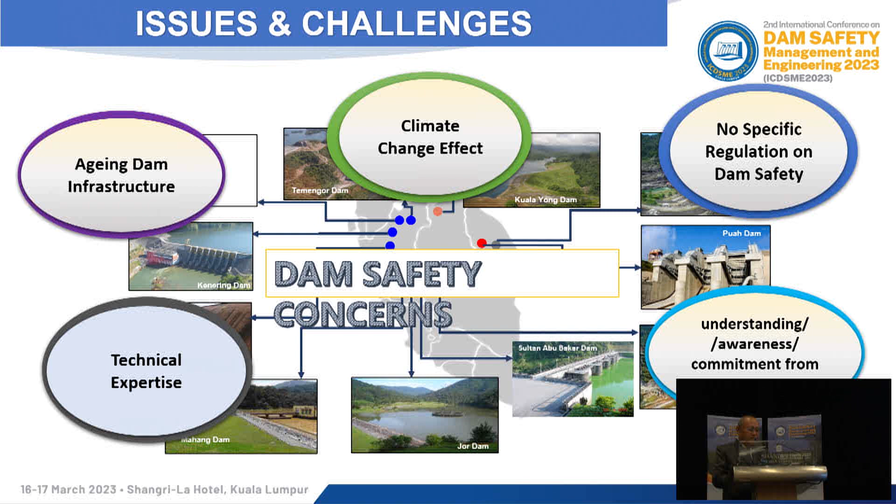Over the course of MyDams' 5 years of implementation, numerous issues have surfaced. One of the key problems is the lack of allocation for maintenance works, particularly from the state government. The state government also deals with a lack of technical expertise in solving rising technical problems. As a result, technical issues cannot be accurately identified at the initial stage of the problem and require time to fix.

For dams more than 50 years old, the operator's capacity to monitor safety is restricted by the lack of original documents, such as design reports.

The main thing all dam owners need to pay attention to is ensuring monitoring and maintenance work, especially for the continuity of dam records and databases for future reference, especially when the Flying Squad inspects. It is important to document potential impacts of operations on public issues, environment, and other stakeholders. Proper record of data is capable of improving the decision-making process related to dam safety and operation in various conditions.

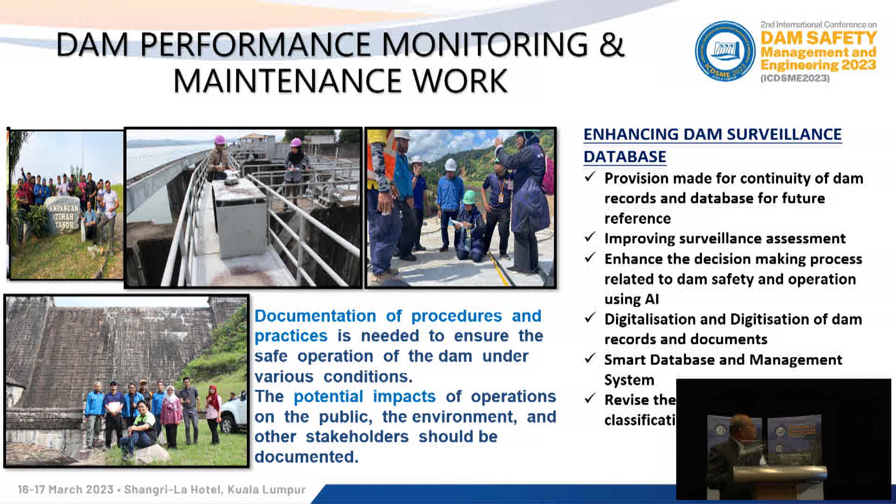For emergency preparedness, all dams must have a complete Emergency Action Plan, EAP. To meet the requirements set by MyDams, the percentage of dams in Malaysia with a good EAP has increased from 35% in 2015 to 65% in 2021. Pre-planned coordination of necessary action by dam owners through emergency drills is very important.

A good EAP enables timely notification, warning, and evacuation in the event of an emergency, reducing the risk of fatalities and property damages. The design, construction, operation, maintenance, and surveillance of dams are all intended to minimize the risk of future dam failures. Therefore, it is important for dam owners to consistently identify conditions of the dams at all times.

In order to improve the efficiency of dam operators, the government collaborates with Malaysia Commission on Large Dam, MYCOLD, to organize a certified dam safety inspector course. In 2021, the first group of 30 participants received certification.

The course was organized with the cooperation and expertise from Ventura, Australia. It received a favorable response from various dam-related agencies, especially dam engineers involved in the dam safety flying squad. The course also provides a detailed technical inspection program for the elements of implementation of dam safety programs.

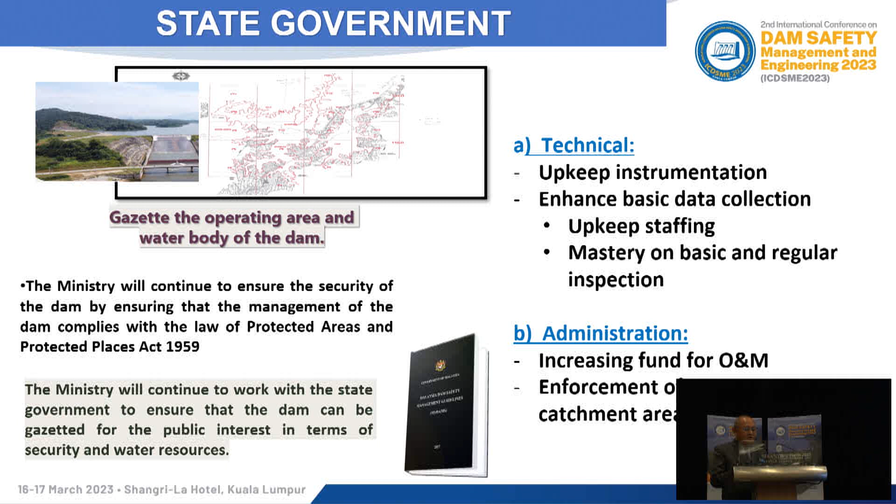Meanwhile, the state government also needs to ensure that the expertise of dam operators improve and the collection of dam operation data is well recorded. Like other nations, Malaysia faces challenges to develop special legislation pertaining to dam safety.

However, before this law is established, it is necessary to first clarify the coordination of responsibilities between federal and state governments. Empowering MyDams under an existing parent law to create legal authority for the guidelines is a step under consideration. The approach of using the existing platform in highlighting this issue, especially for dam owners,

especially dams owned by the state government, for attention and action, is the shortest way possible. Therefore, further engagement sessions with state water regulatory bodies will continue to be organized for exposure and awareness in regards to dam safety.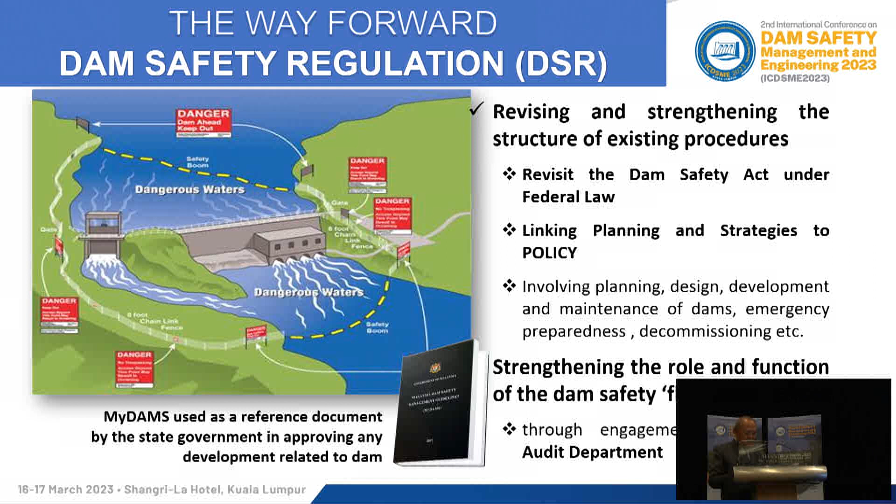The federal government's primary objective in this project is to regulate the safety and security issues related to construction, operation, and management of dams. Meanwhile, matters related to rivers, water, and land, including activities and utilization of such land, are largely within the jurisdiction of state government.

By referring to the recent development of the Dam Safety Act institutional arrangement in India, Malaysia can learn from the initial challenges and obstacles faced by the Indian government. It took them a sustained effort over the last 4 decades before the Dam Safety Act 2021 was enacted by the Parliament in December 2021.

The Act provides, as presented just now, for surveillance, inspection, operation and maintenance for all large dams, as mentioned, for those with height more than 15 meters.

The objectives of MyDams are to ensure that the management of dams in Malaysia is systematically and effectively implemented, that the integrity of dam safety is in place, and that the dams are functioning as per design. The ministry has put in effort to ensure that all our dams are maintained in a sustainable and environmentally friendly manner and operate in accordance with MyDams.

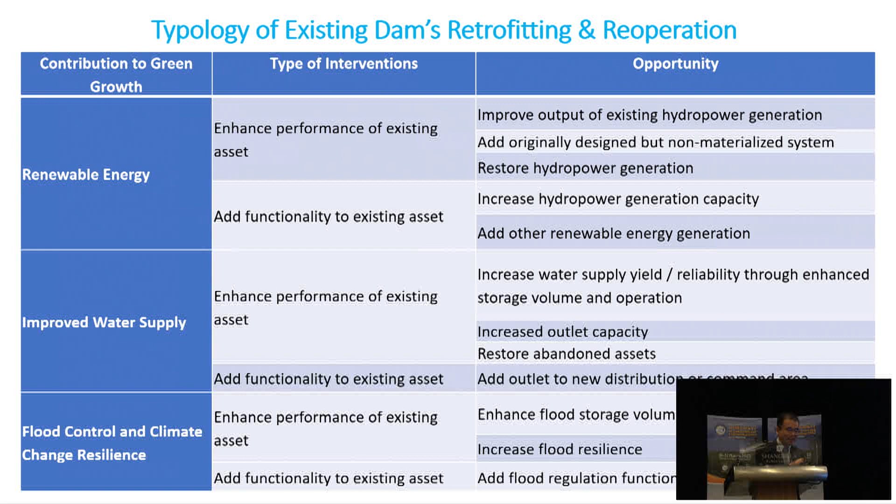I really need training for this. Oops.

Before going into the knowledge product, a product related to dams, I'm going to introduce more knowledge products and our contribution to dams and hydro.

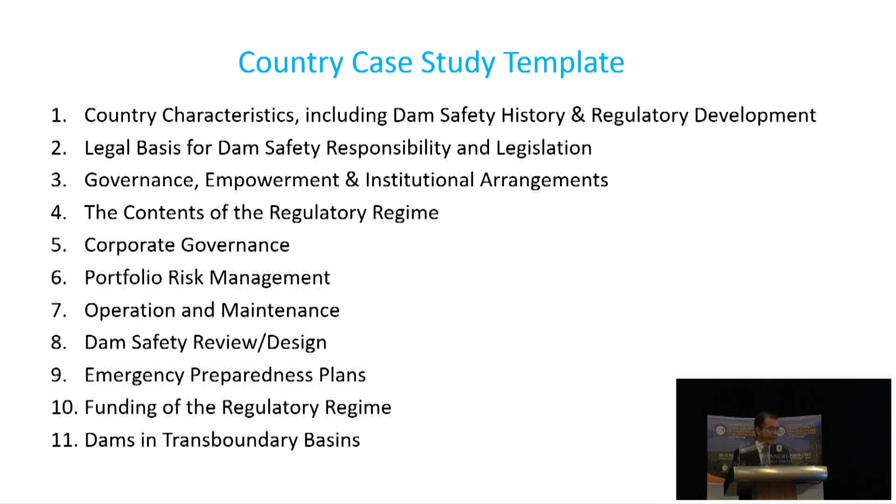Here is a template of country case studies, including country characteristics, legal basis for dam safety legislation, governance and institutional arrangements, contents of the regulatory regime, operational maintenance, emergency preparedness plan, and so forth.

First, we looked into the legal system or types of law, since there are distinctions about the legal provision for dam safety, for example between civil law countries and common law countries. Civil law strictly prescribes dam safety requirements in legislation with no judicial precedent, and dam safety regulation should be conducted in a more prescriptive manner. Common law is primarily based on judicial precedents, allowing generic laws with reference to guidelines and required standards.

Now, the continuing legal basis for dam safety assurance: only 14% of countries or jurisdictions have legislated a dedicated dam safety law, as shown in blue. Around two-thirds of countries have covered dam safety under broader enabling laws or mother laws with regard to water or environment management and water use sectors such as irrigation, energy, and so forth. These are shown in red for water law, green for environmental law, and gray for water use sector law. The types of enabling laws differ from country to country depending on the types of dam portfolio, development of dams history, and so forth.

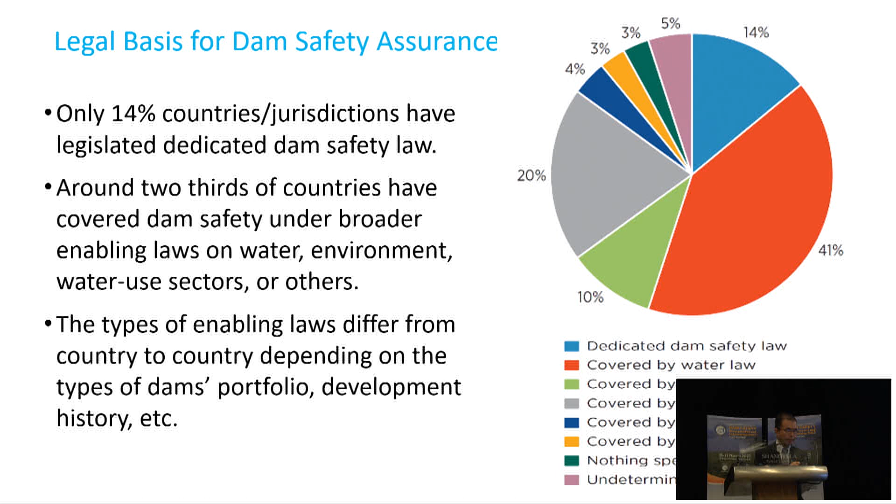This independence or separation of laws between owners and regulators is very important, but in reality, independent dam safety authorities which do not own any dams are not universal, as shown in dark green at 24%, and are also predominantly located in high-income countries.

Some countries employ a self-regulation system with some semi-independent review mechanism and specific codes and guidelines, shown in green and yellow. Self-regulation countries without any legislation, shown in purple, manifest significant gaps and risks with no or inadequate technical guidelines, monitoring and reporting requirements.

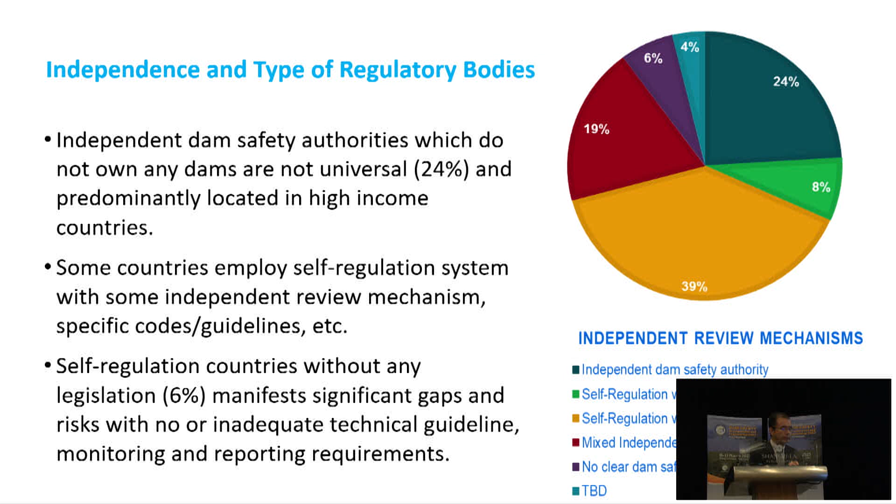This slide shows, on the vertical axis, the different types of authorities or powers endowed to regulators, and the horizontal axis indicates the number of case studies. Most countries have given regulators the power to develop norms and standards, issue licenses and permits, maintain a register and inventory of dams, and even the power to conduct audits, inspections, and so forth.

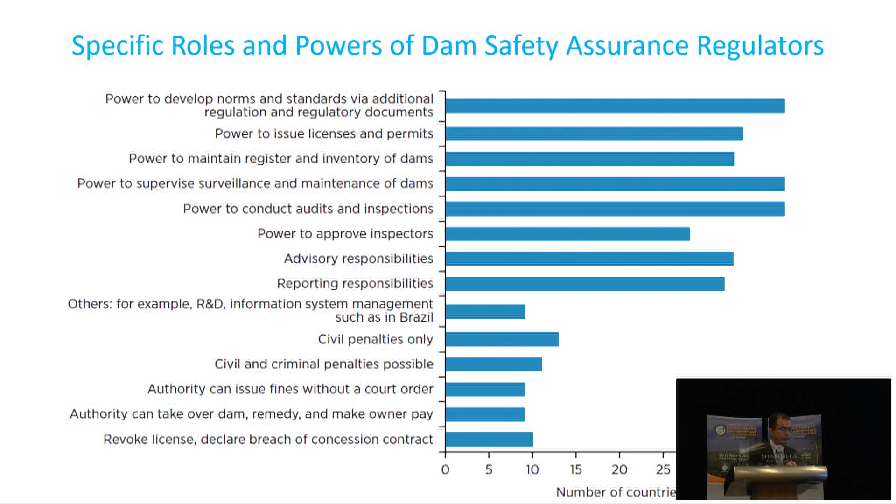Now I'll show two slides: the first on capturing criteria for dams legislation, the second on the dam classification system. In many countries, a minimum height or capacity is specified under laws or regulations for standardizing which dams are subject to legal dam safety provisions. The threshold should be sufficiently low to capture most dams subject to regulation.

Since it's not an easy task to complete existing dam registration, even in advanced countries, it's important to carefully consider available resources and the capacity of regulators when setting up capturing criteria. Dam mapping, using satellite images and so forth, is becoming an effective tool for small dam capturing, as client countries often do not have a full inventory, including small dams.

Now this is the dam classification system, which is instrumental in defining the design criteria and dam safety requirements for different classes of dams, based on the risk of dams. Around two-thirds of the countries have established a classification system, which is largely categorized into three types.

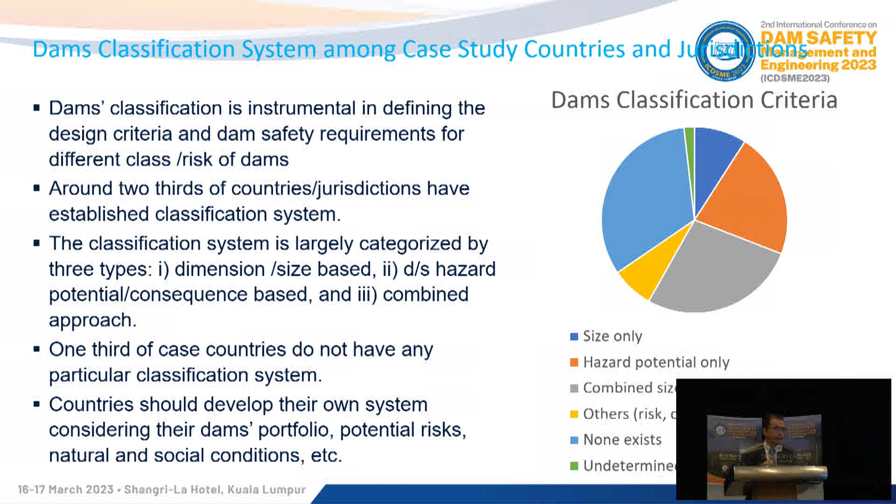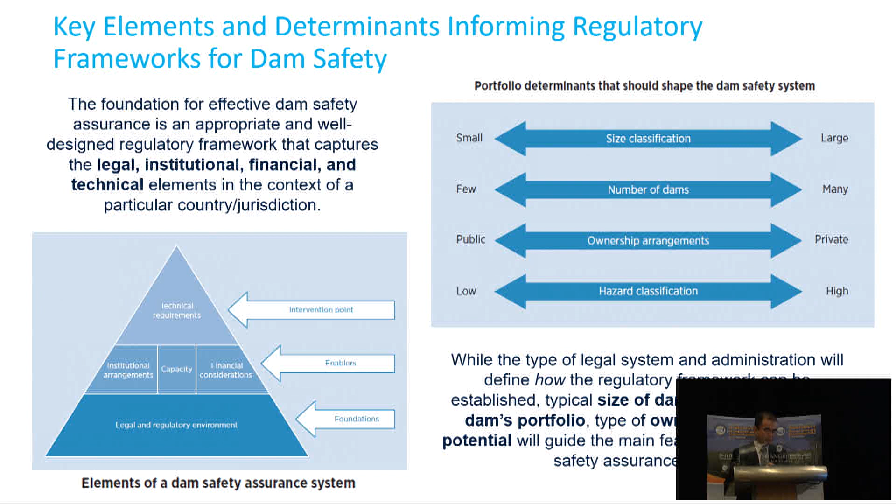This slide shows the decision support tool for informing a suitable regulatory framework for dam safety with key determinants. From top: the legal system, common law or civil law; then the administrative system, centralized or decentralized; then the owners, primarily public or private; and then the portfolio size and the dam size, general risk or downstream consequence level. Depending on the country's portfolio characteristics, including these key determinants, continuum options can be derived.

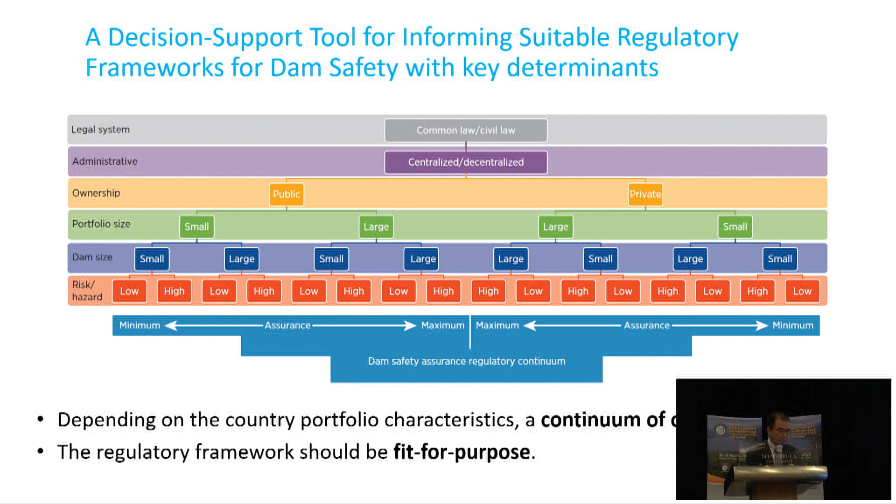Thank you very much for your attention. You can download the publication from the link here. Thank you.